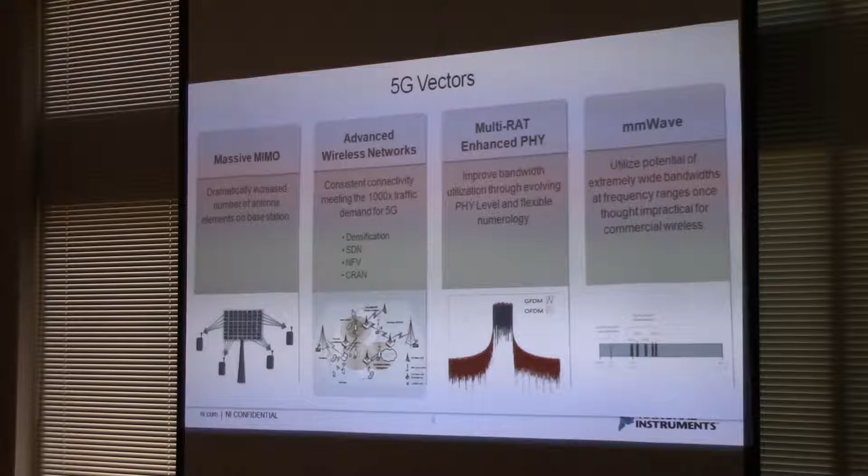So the first one up is massive MIMO, then advanced network architectures. This is very closely related to things like cloud-based RAN that we've talked about this week. Multi-RAT and basically better waveforms, so things like GFDM, LoRa waveform, things like that, and then millimeter wave, so higher spectrum, channel sounding, all that kind of thing. What I want to do just before we use the radios is give you a little impression about who uses these radios and what they use them for.

So let's dive in. So massive MIMO, we're all familiar with massive MIMO, right? We can take multiple antennas and start to beamform in order to serve multiple users on the same frequency. You get much higher spectral efficiency. You get much higher transmit power efficiency. So there's a lot of interesting work going on here with these radios at a number of different universities and a couple of big names out in industry. I want to show you a couple of the examples.

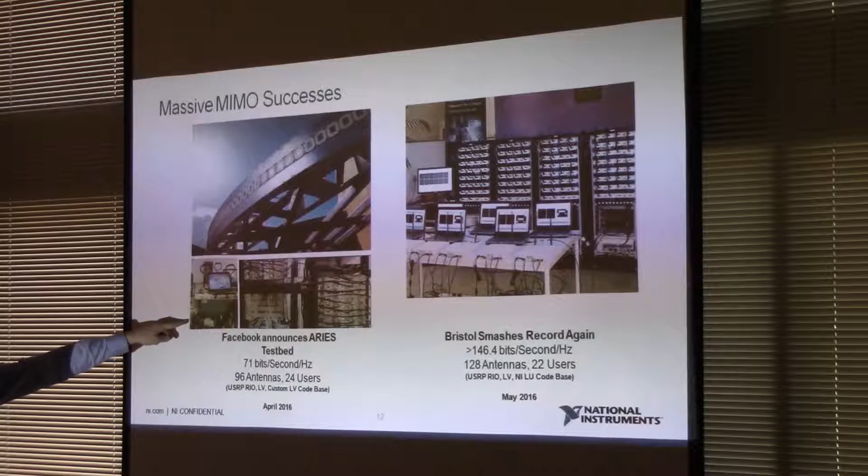So these are 2 customers of ours, and you'll recognize these are those radios you have in front of you and some down here. This is the base station all in the rack, and these are the user equipment. And then this is Facebook's base station and their user equipment. Can you see it's on wheels? It's automated, so they can drive the user equipment around to different places. Now these 2 guys were competing for a long time, but they're actually in very different fields.

So what Facebook are doing with Project ARIES in the Facebook lab is actually trying to use millimeter wave up at even 90, 91 gigahertz, and they're trying to use massive MIMO in order to push the signal further, because you can focus the beam, like a bulb versus a spotlight. You can make the energy actually travel further. And they're trying to do that from a rural mobile broadband point of view. So they want to be able to begin with fixed point access to rural areas.

And you've seen the previous Facebook lab projects around their internet access in India. They currently have a couple of helium balloons up over Peru for disaster relief broadband internet. So it's this similar kind of idea, being able to deploy a mobile broadband network without the need for putting in physical infrastructure.

And then Bristol, coming from a different point of view, they were actually trying to drive spectral efficiency. So this is part of a city-funded project in the city of Bristol in the UK, where they are trying to realize the Internet of Things and all of those billions of connected devices. Now there's nowhere near enough spectrum available with our current technology under 6 gigahertz in order to connect maybe 1 million devices in Bristol.

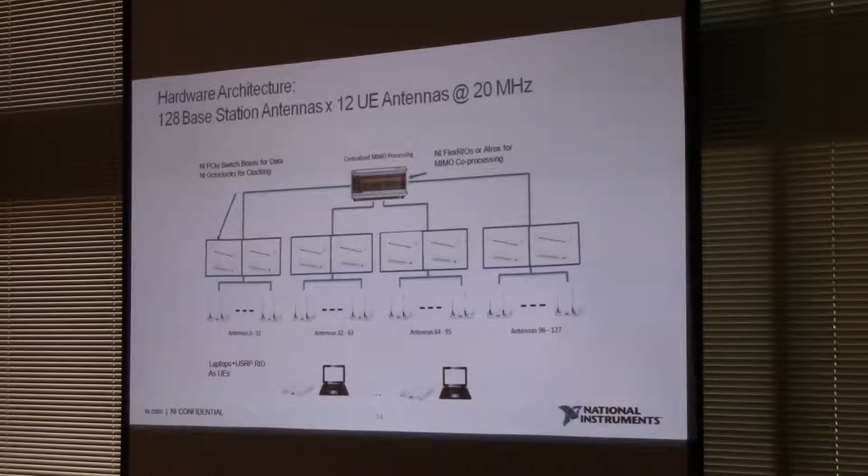Okay, so we'll switch to slightly different aspects. So this was on our NI Week keynote stage a couple of years ago. This was what Samsung did with FD MIMO. Is anyone familiar with FD MIMO? Okay, so exactly, yeah. Being able to do full duplex MIMO is going to not just take that 140 bits per second per hertz, but could increase that. If we can go full duplex over the channels instead of TDD, FDD, all this kind of thing, then we could push that 140 to 400 bits per second per hertz. And that would be an absolutely insane number.

And then as well, they were doing a bit of full dimension, whereby normally when we talk about MIMO, we put all the antennas in a row. That only gives you spatial multiplexing in one plane, X and Y. But if you were to put the antennas into a 3D grid, then you can start to spatially multiplex up and down as well. So we've gone from focusing these triangle-shaped beams to now focusing spotlight beams. And that's really good if you want to service an environment like a stadium, or maybe you have an apartment block of flats. Now you can target a certain flat within that apartment block.

Apartment, flat. I'm trying to translate for you guys.

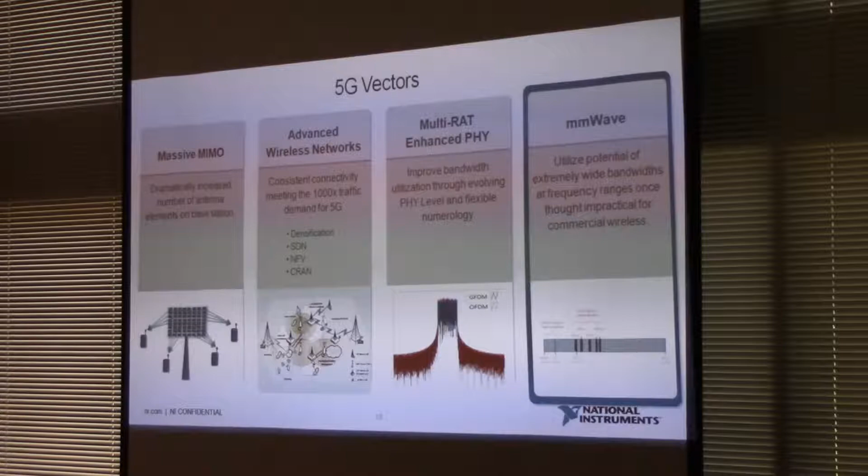And then lastly, we'll jump straight into some millimeter wave stuff. These ones are 2.2 gigahertz actually. These are some of the older models. We have USRPs that go from 10 megahertz up to 6 gigahertz. But if you want, we have hardware as well that goes into millimeter wave for things like high accuracy measurements in channel sounding.

But you can also use these USRPs as the intermediate frequency within your superhet design, and then you can externally put a millimeter wave head on the front of that. So we worked with NYU Poly and Nokia on two different kinds of case studies.

So the first one up, this is Dr. Ted Rappaport from NYU Poly, and he used to be at UT Austin actually, right next door to us, before he moved there. Now Ted's always been into the millimeter wave side of things, and up until very recently, all of the 3GPP standards were being centered around, how to say it politically correctly, around a millimeter wave channel model which was almost entirely theoretical and based on how millimeter wave CW sine waves interact with an environment.

Nobody had ever taken a complex wave like a CDMA wave, pushed it up to millimeter wave, and then seen how a channel or a room or an environment reacts. Ted was one of the first to publish any data on how real-world communication signals react at millimeter waves, and it turns out it's wildly different to how a sine wave interacts with the environment. So his environment was New York City.

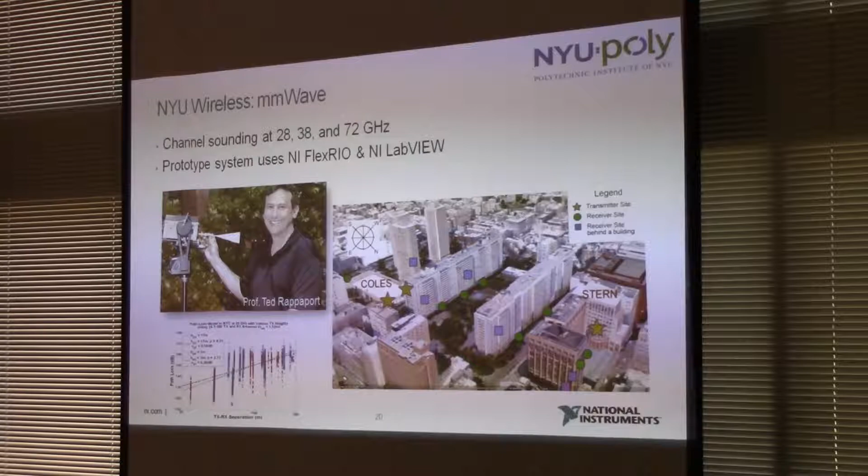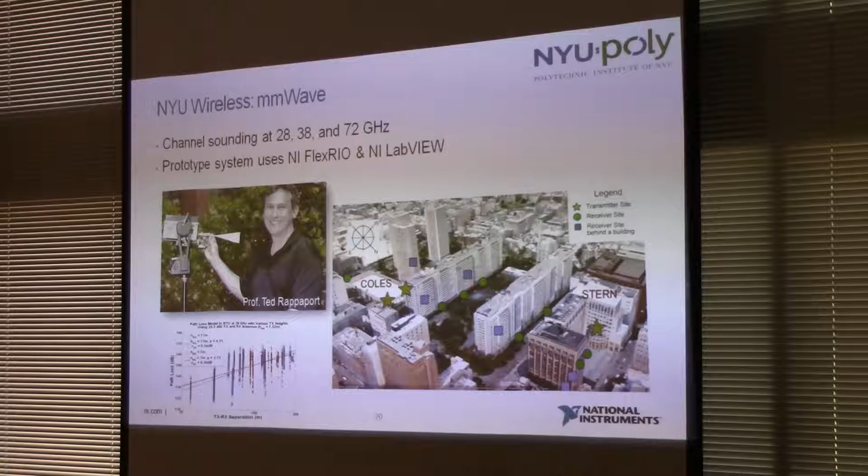That was his playground, and he set up these motorized stages with a millimeter wave head on top. Out the back it goes to the PXI chassis, and a horn antenna on the front for that directionality. And he set them up around the city, and they were automated, so they could turn around and do channel sounding within New York City. And the results he got went into the 3GPP standard, and now almost all of us within 3GPP are working off Ted's channel models, and have been for a couple of years now.

And then lastly, Nokia, again like the massive MIMO side of things, were in millimeter wave as well, but they had a very different interest. So Nokia have come from being the world's foremost handset provider. Most of us are probably old enough to remember owning a 3210, the indestructible phone that lasted a week on battery. But now what they're looking to do is more on the base station side, more on the service providing side,

and what they were working towards was up at millimeter wave you can facilitate channel bandwidths that are absolutely huge compared to sub 6 gigahertz. So instead of your typical LTE channel bands at 20 megahertz, 40, maybe if we look at 802.11 you have 160, and now people are talking about 200 megahertz channels. At millimeter wave, instantly you can have a 1 gigahertz or a 2 gigahertz channel bandwidth very easily. People are now starting to talk about 3 gigahertz channels, and that allows you to push the data rate insanely high.

Now, I don't know what we're going to use this data rate for on our mobile phones. You can download a full 4K Ultra HD video in 10 seconds. But then again, when we made 3G and CDMA became popular, YouTube didn't even exist, let alone YouTube on our phones.

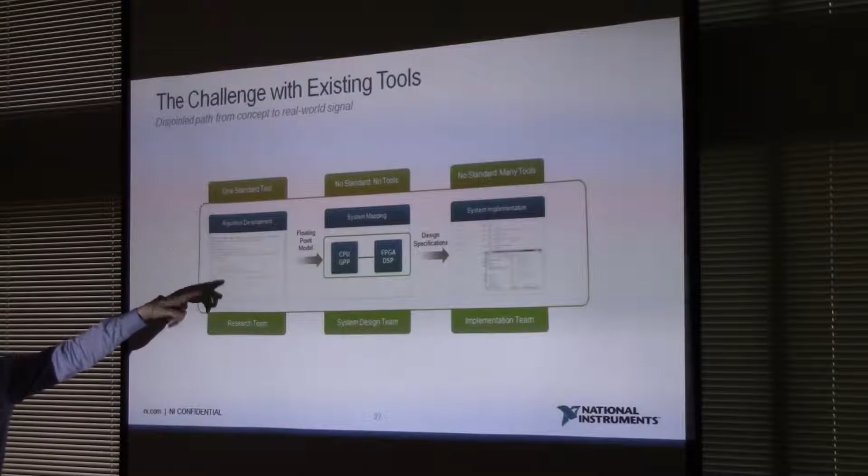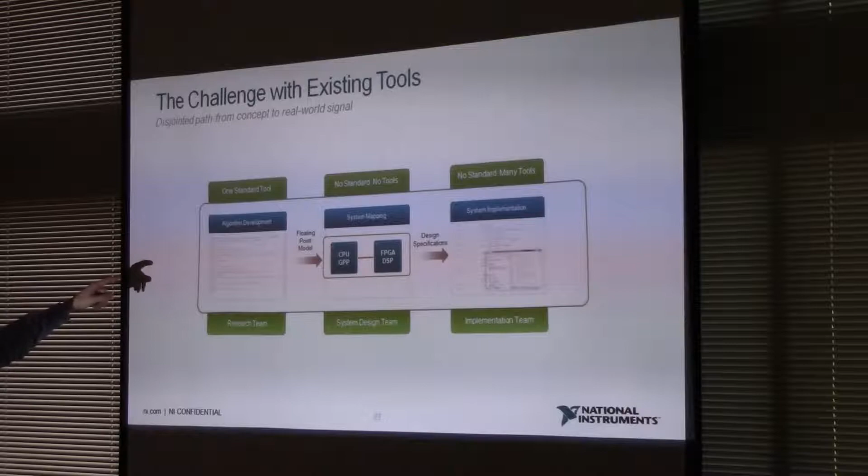Well, you know, this is a complexity problem. It's also a time problem, which is important for you when you're trying to deliver on deadlines. It's important for industry when they're trying to get to market as well. So we described that algorithm development stage. Then you have to go into the mapping stage. And if you come up against problems in the mapping stage you can't get around, you have to go back to the algorithm and start trying to problem solve there before you can get to the next stage again and prove out whether you actually did. And it takes ages to go back and forth in this process.

So wouldn't it be cool if there was one environment that covered it all? You could do the algorithm, you could do the system mapping, and then you could deploy it to a working prototype without ever having to learn a low-level programming language or having to step outside of that one environment, so you don't have this back and forth process. And lo and behold, as you guys have probably guessed, for us at National Instruments, that whole environment is LabVIEW. So that's what we'll do. I'll show you how to design an algorithm, show you how to deploy it, and then I'll show you how to get it working over the airwaves.

So, without further ado, let's actually use the radios. Now, what I'll do is I'll try and run the class from the front here, and everyone can follow along. Some of you will be new to LabVIEW, some of you will be new to software-defined radio, and so forth. So please ask questions, make this interactive. Don't make me wear out my voice the whole time. And we'll walk through and I'll show you what to do at each step.

Now what we're going to do is just take the hardware and the software for a test drive. I'm not trying to teach you how to use LabVIEW. I'm not trying to teach you what software-defined radio is. I am definitely not trying to teach you how to implement LTE or what is an LTE stack or anything like that. Remember, I got my master's, you guys got your PhDs, so we got to respect that.

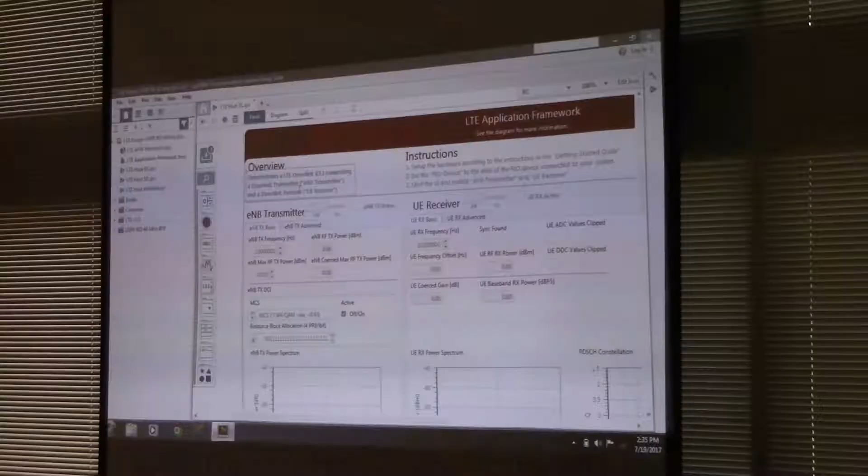So let me close all this down, neaten this up a little bit so we can see a little easier. Now what has opened up is the LTE host downlink piece of code, and this is a complete transmit, receive, loopback piece of code. We don't want to do that. That's just transmitting and receiving on the same device. Let's prove that this works over the airwaves for real, and I'm taking a bit of a risk here. So right now I'm going to play the, no, not yet. I'll play that role in just a minute. Using the little X at the top, close that piece of code. We don't want that loopback.

Guys in the front here, you're my base stations. Can you please go to this piece of code, double click it, and it'll take just a minute to open. This is your base station. You might see this arrow is not yet green. It'll turn green after 10, 20 seconds. That means the code is compiled and is ready to run. What you need to do is just a couple of things. Over on the right-hand side of the code here, it says RIO0. And it says clock source is internal, so it's going to use its own reference clock. That's good news. And then what you can do is just press the run button.

Well, why did I do that? I have no hardware connected. So I'm going to come back now and just take a look. Cool. So over on the right-hand side of that code, there's this FPGA ready. Now what that means is that we have fully deployed to the FPGA, and the FPGA is ready to go. You should have a blue box in there. Does anyone not have the blue box? You got it? Cool. Right, now that the FPGA is deployed, we're ready to run the base station.

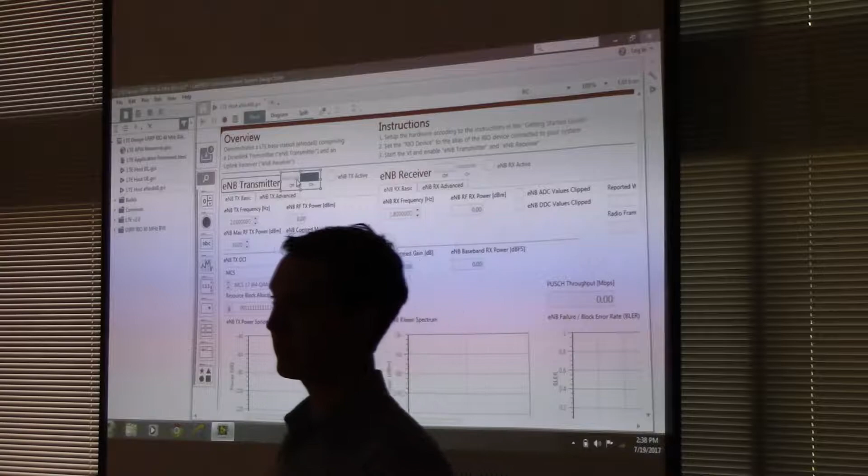What you should find is a frequency control. You might have to go over to, yeah. Okay, so you want to change that to 1.7G. 1.8? 1.8 gigahertz, 1.9, and you guys can leave it at 2. You get 2. I'll collect the submission fees for that after. Can we do the same? So 1.7, 1.8, 1.9, and then you guys can both go on channel 2. You'll both receive off this one base station.

Okay, now try running your transmitter. Excellent. So base stations, now you're transmitting just the downlink side of an LTE stack, but let's get some uplink going as well. So can you turn on your receiver and tell me what you see on that graph? Okay, that's good. Do you see a bunch of mess? Oh yeah, please run the frequency. What is it? Okay. Let me take a look at mine.

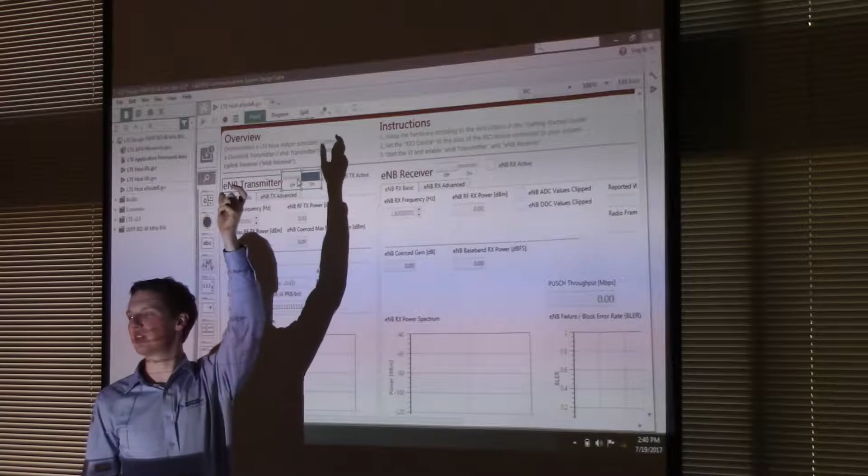So if you go for 1.75, 1.85, 1.95, and then 2.05. Yeah. So can you see that you have this receive frequency? So we're doing FDD, right? So let's change that. Just put it 0.05 of a gigahertz above your transmit frequency.

And you'll have to turn the transmitter off to get that frequency to apply and then turn it back on. Sorry, the receiver, I mean. The receiver only? Yeah, just the receiver. And then if you turn it off, back on. Cool. So you should see very little. There's a little bit of noise in there, that's interesting. There's a couple of spikes. This is good. Oh, a couple of spikes there. I wonder what that is. All right, we're good to go.

So guys, are all your FPGAs ready? Excellent. And your frequencies for your receive is 1.7, 1.8, 1.9, 2.0, right? So can you please press on for the receiver on the left-hand side? Oh, sorry. Yeah, sorry, I've done that wrong, haven't I? Sorry, the receiver's on the right-hand side. So you can... Okay, it's kind of messy. It's not bad. You guys have got something sort of... there's a bit of a stack there. Just a peak. Okay. And that's a 2.05.

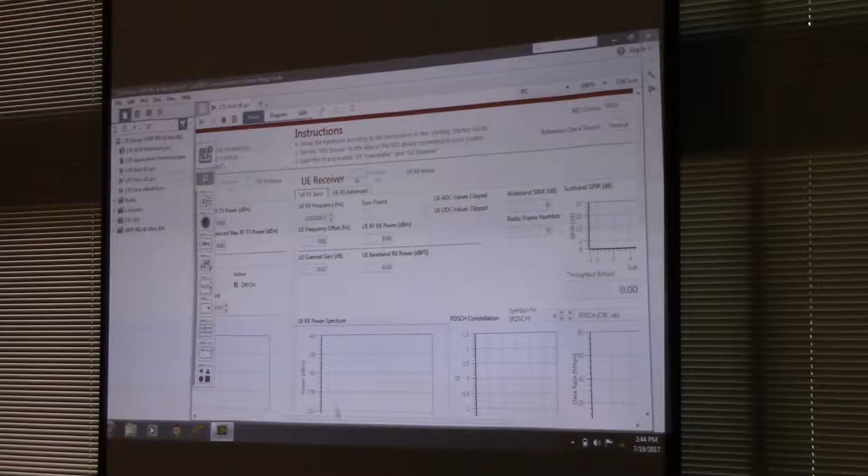Oh, right. Sync cancel. And we just need to stop the code. So if we scroll over to the right, you can press the stop button there. Yeah, I should have pointed out to you guys as well, there's a stop button over on the right here. If you need to stop the code, you can press that. It's better than aborting the code, because aborting the code will leave some references open, which is normally okay, but sometimes it will cause you problems later. So use the stop button to stop the code when you can.

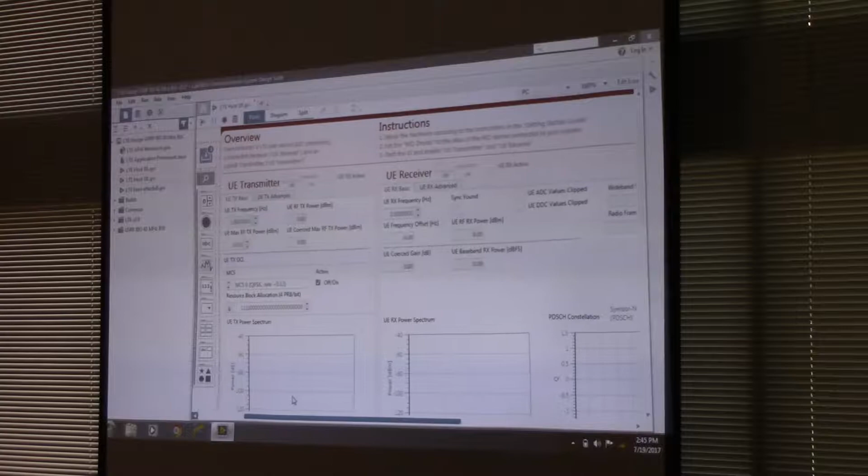And then what we'll try and do here, if you open up the eNodeB, and if we go to edit at the top left, and reset panel to default, and now run this code. Cool. Let's just scroll across. FPGA is ready, so let's go over to the left, turn on the transmitter and the receiver. These frequencies are good. Okay, so if everyone now turns on your downlink receiver, let's see what you get. So we're just using one base station now.

Okay, the constellation comes through, it's a little bit messy. Which process? Just leave them as defaults. So if I look correctly here, host UE. So yeah, the receiver frequencies are up there. So 2 gigahertz receive and 1.8 transmit. So if you now turn the transmitter off. Did everyone just lose connection? Yes. Good. And then if you take that power, turn that to 30, and turn it on again. How's that constellation? Okay.

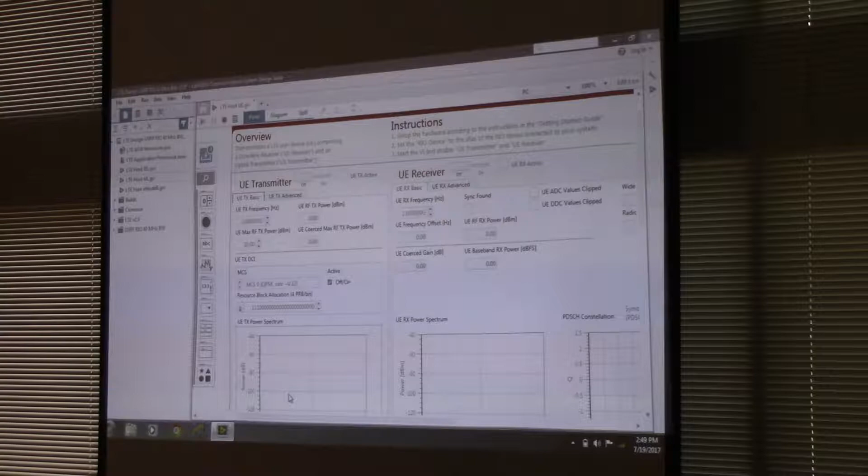So, you know that stop button I told you about? We can all stop the code now. You can stop the base station as well. So what we just managed to do, we've gone from making multi-base station, multi-user connections. Now we set up one base station, and we made a downlink connection and then an uplink connection back from everybody to this one base station. But you saw that constellation was pretty messy as well.

So what we were doing with these pieces of code is we've set up this LTE physical layer stack with a little bit of MAC on top, but we're only sending pseudo-random ones and zeros, just a bit stream of noise. So wouldn't it be more interesting if we could actually put an application on top? I mentioned before how we can pair up LabVIEW with other environments, like NS3 or other things. What I want to do now is pair it up with VLC Media Player, and we'll do that using a UDP port.

I should have drawn out a diagram beforehand. We'll do this on the fly. Microsoft Paint. VLC is orange, isn't it? So we're going to set up a VLC player and a second VLC player. And this is going to talk down to LabVIEW. No, undo that. That's not what I want. And then we have the software-defined radio, right?

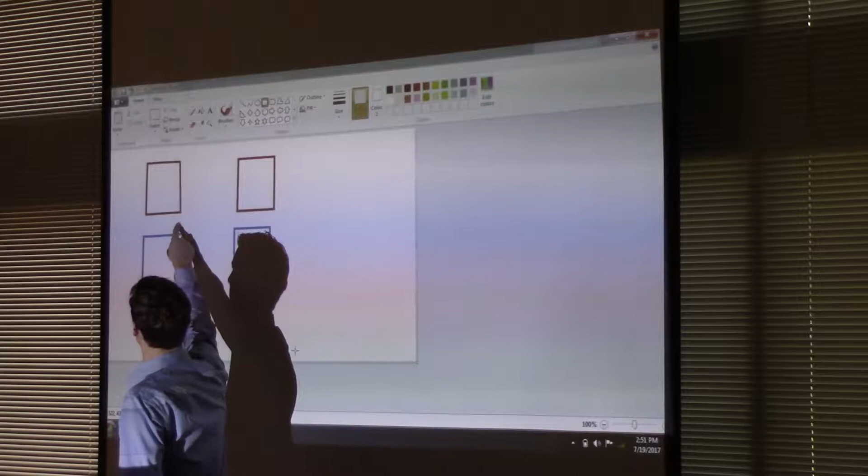So we're going to set up a stack whereby the VLC player spits out the video stream to a UDP port. Then LabVIEW looks at the UDP port to pick that up, and transfers it over PCI to the radio. The radio is going to transmit it. We're going to do this in loopback, just for the sake of time. Pick it back up over PCI to LabVIEW. LabVIEW then decodes that video information and puts it out to a UDP port, where VLC will look for it and receive it. So we're making an entire end-to-end video downlink.

So back in this piece of code, use the little X to close everything down. Use the stop button to stop the code and then close it.

What we'll do is we'll open up that last piece of code at the top. Can you see there the LTE host DL downlink? And as soon as you've got the green run button, press run and get that running. And then go over to the right-hand side and look for that FPGA ready button. Anybody doesn't have FPGA ready? Okay, good stuff.

Now what you can do is come back over to this view here. You can leave the frequencies as they are, and what we'll do is we'll try this and see if we get a lot of interference, and if we do, we'll spread out different frequencies. If you turn the transmitter on, you should see the frequency block come up. Turn the receiver on and you should see the constellation.

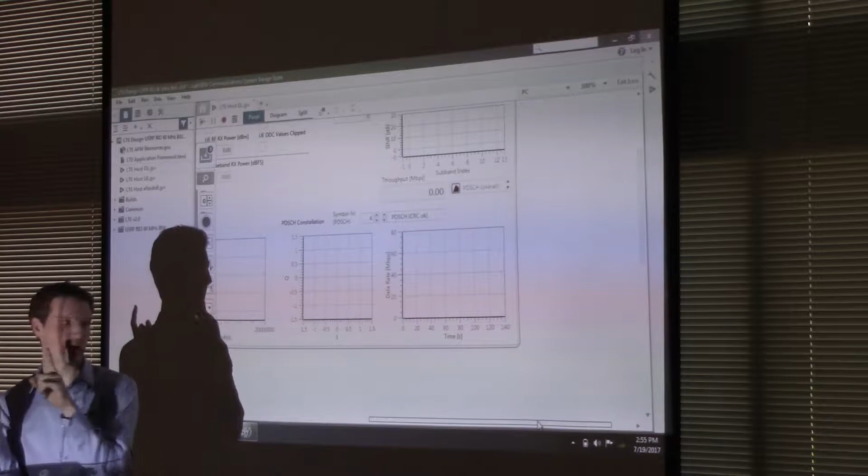So you should get a really nice constellation plot here, really neat, because the transmitter and receiver are right next to each other, and you should start to get a throughput graph here, and that graph should be almost entirely all green. Now what that means is that we're just doing what we did before. We're transmitting just a pseudo-random stream of ones and zeros. The green on that graph is ones and zeros, just random noise data.

If you start to see blue, that is user data, and that'll become important later. What this piece of code is configured to do is that if we're not using the entire downlink channel that we have described at the clock rate that we have described it, it will pad on to our user data just some random noise, just to make sure we're always using the full channel for ease of use.

So, what I want you guys to do now is, if you go to the desktop, let me show you, you should find Application Frameworks Video Demo. I want you to open that up, and there's a folder in there, Video Demo, and there's a number of batch files here. What I want you guys to click on is this one. So Video Loopback LTE. If you double click that, we get another warning message, just say, yeah, allow access. You get 2 video files playing.

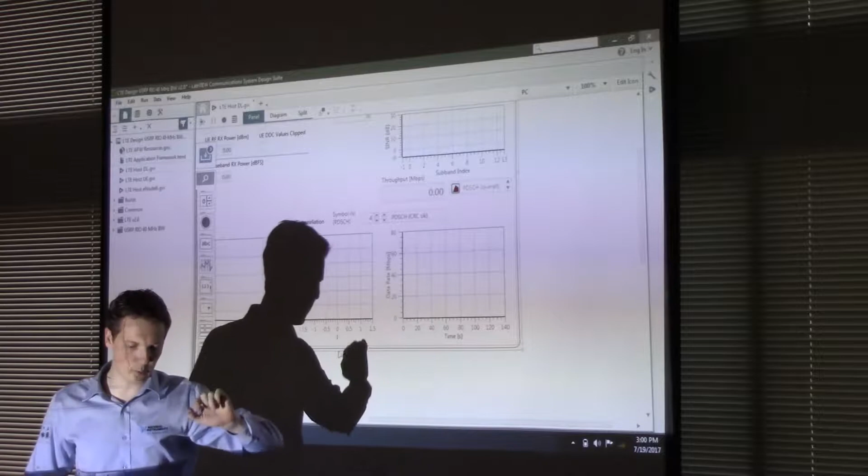Now what I want you to do is head back to these graphs that we talked about. What you should see on your data usage graph is that yes, you still have a lot of green bandwidth, but you should have some blue bandwidth as well. Now that is your video data. That's how much of this 40 megahertz, or I think it's actually a 20 megahertz channel within a 40 megahertz band, that we're actually using. Is there a tiny bit of blue? Tiny bit of blue for HD video.

Okay, so now let's start playing around with that channel. What you'll see is that you have a characteristic shape on your transmit that you should be able to see on the receive as well. It's like the full LTE band, but there's a notch out of one side. Now what that is, is that we have decided not to use the two first resource blocks, those two subcarriers right at the start of the band.

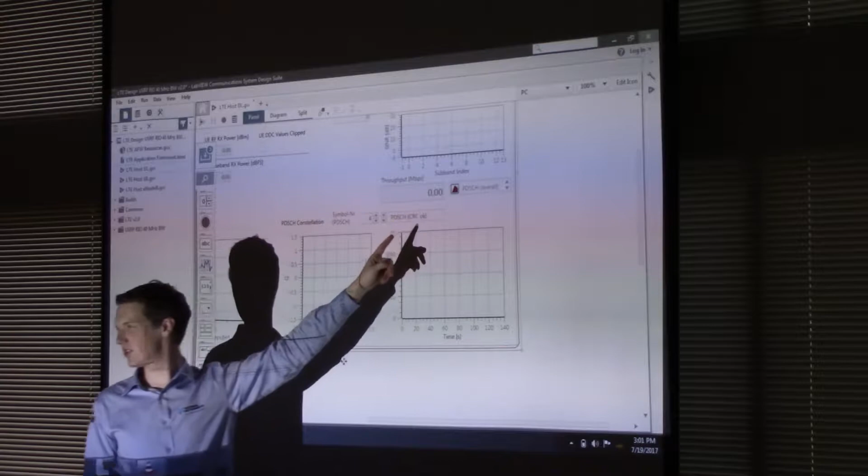Let's mess around with that a little bit more. Take note of what number you have here in your throughput. That is your total data throughput, video and random noise for the whole channel. If you come over to the transmitter here, what you'll see is that there's this resource block allocation. And you see we've chosen not to use the first two subcarriers. Let's knock out a couple more.

So if you click in the middle of there, and if you delete five ones, put in five zeros, anywhere you like, just make sure you get the correct number in total. And then click outside of there. What you should see back over on your transmit and your receive is that those resource blocks are now missing. There's not even a carrier inside them.

Now, I mentioned GFDM at the start of the session. What we were doing with Gerhard Fettweis on these devices with GFDM is we were knocking out some of the non-essential resource blocks in the middle of an LTE band and putting the very narrow GFDM spectrum inside those missing resource blocks. That actually allowed GFDM and OFDM to coexist together inside the same channel, which was pretty cool.

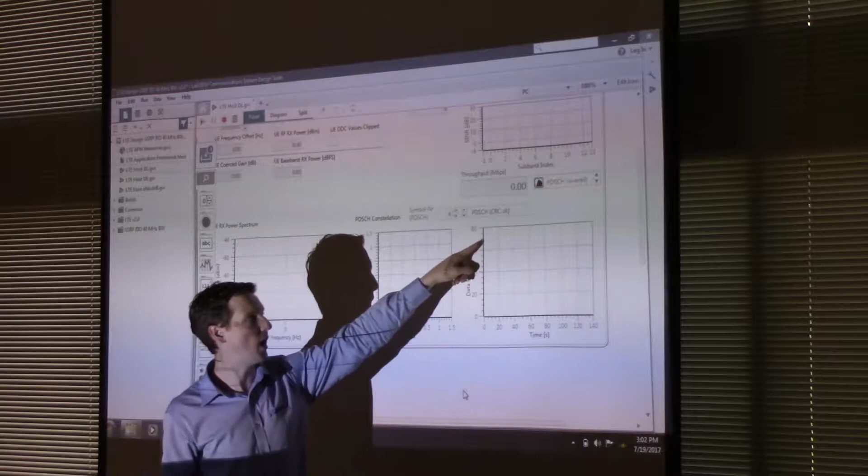What you'll see if you scroll over to that data throughput is you should see a notch where your data throughput has gone down. And if you look at the throughput number, that should be a lower number of megabits per second in total. Does anyone not see that?

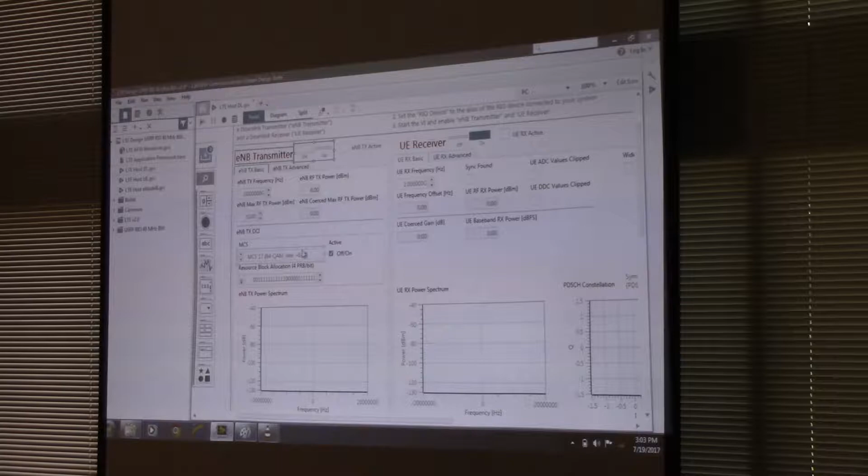Okay, cool. And then lastly, what you can do is come back over to the left-hand side here and turn off the transmitter. And then go back to that video. Hopefully you've still got it in front of you. The video should last 1 or 2 seconds and stop. It should freeze on the final frame that it has a valid transmission for.

Go back to the transmitter and turn it on. Turn the transmitter back on. And what you should see is that video picks back up as soon as the video buffer is full. And you'll notice it doesn't pick back up from where it left off. It picks back up at the most recent transmission. So it's actually skipped a few seconds forwards so that you're always viewing live data.

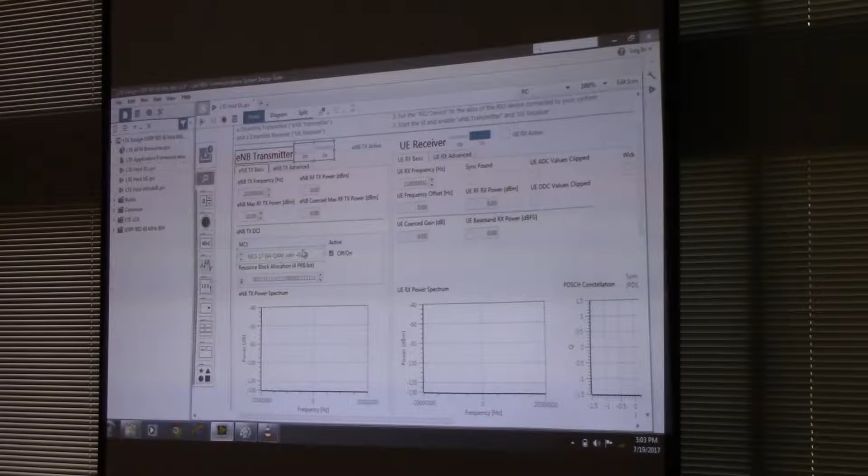Okay. Is everyone happy? All right, excellent.

So again, at the top of the screen on the right-hand side, you can use the stop button to stop this code. And then what we'll do is, I need to grab some water. If anyone else needs to grab some water, do it now. And we'll run 2 more exercises after this as well.

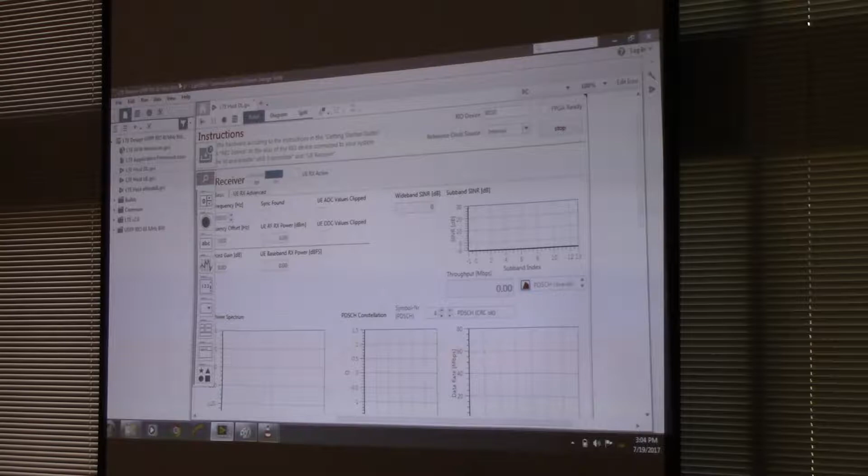But for now, we're done with the LTE stack. So let's leave all of that LTE stack behind. Let's go right down to the physical layer. We'll talk just about OFDM, not so much about LTE now. And what I want to show you is how do you use this hardware and software in order to do algorithm prototyping and design. So I'll show you the first one up here on the stage. You guys can follow along, but I'll do it quite quickly.

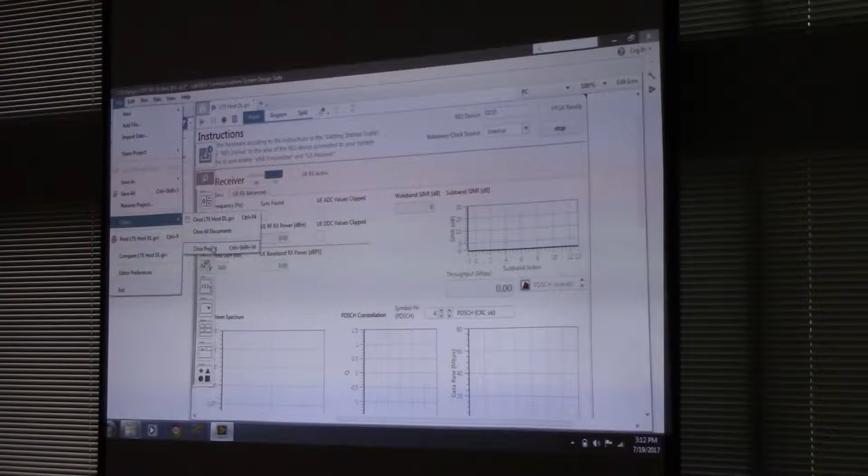And now what I'll do is I'll take us over to the learning section that I said we'd use. No, let's go into getting started. Actually, yeah, let's go to the examples. I'll show you a completed one just for the sake of time. No need to follow me here. I'll just show it for 2 minutes. You can see we have all these different completed examples for different basic modulation schemes.

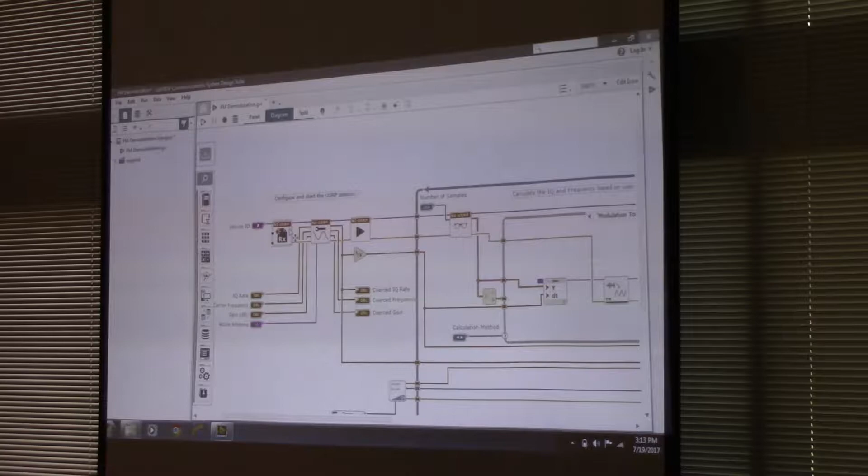What I want to show you is the ability to program in whatever computation method works for you and your particular project. So at the moment, we've been programming primarily in LabVIEW, which is all of these function blocks with the wires that travel between them. I'll show you a couple of different ones now. The first one I want to show you is that with programming languages, there's always 100 ways to do any one task. Now what we're doing is FM demodulation.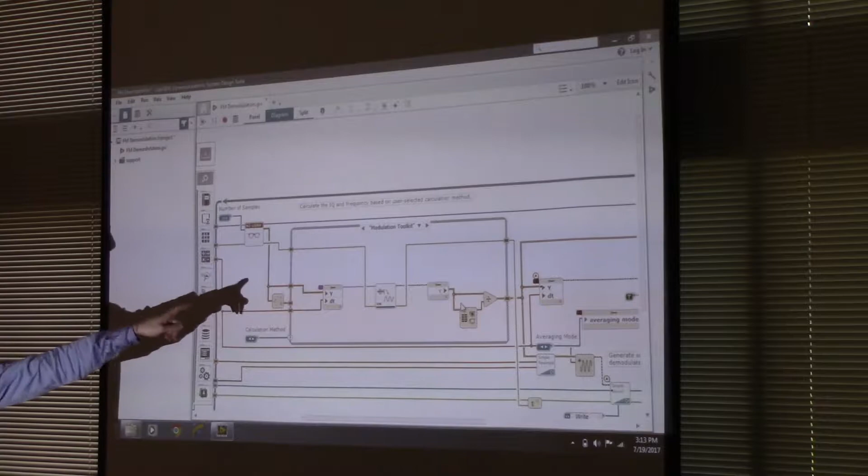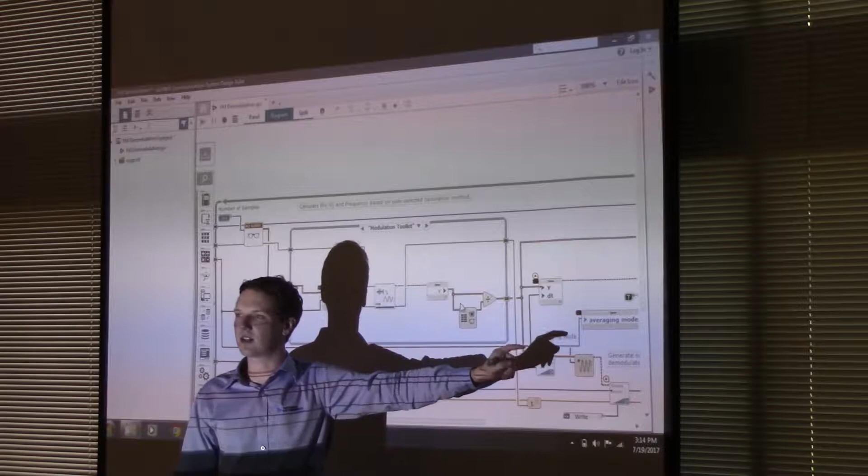Over on the left-hand side, I find the USRP. Here I do FM demodulation on the signal that I read out of this block. Then I resample it, send it to the sound card of the PC, and play the radio station that I'm trying to listen to. What you see there is that inside LabVIEW, there's an FM block. Right? This is about that inbuilt IP that's already in the software. So for FM demodulation, there's a block.

This is good if you want to just test ideas quickly, because you can take that block away, go put the AM block in. Take it away, go and put the QAM block in. It takes like 3 clicks just to change what modulation or demodulation you're doing. So it's really quick to take an idea and just test it out. You don't have to necessarily consider whether it would really work. You can just try it. Makes for some very lazy programming, which I quite like.

Sorry? Oh, it's demodulating FM signals, I think. Or maybe it's just called FM demodulation. It should be in the modulation folder.

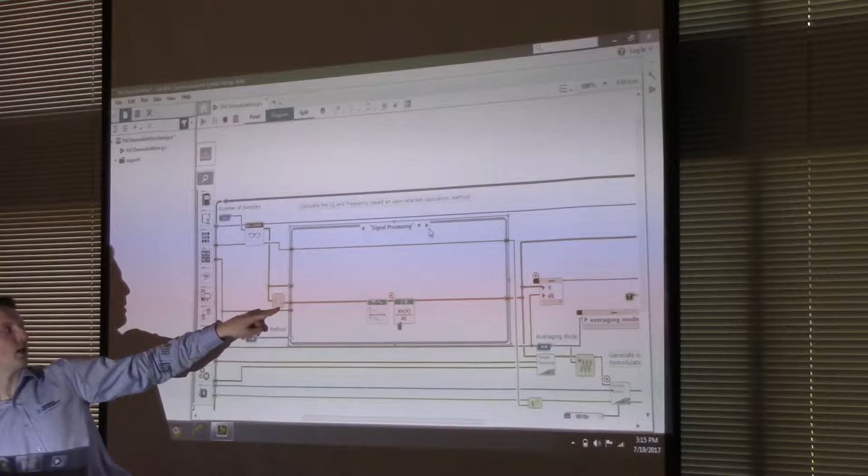Now, you can actually do things a different way as well. You can use those LabVIEW functions but you can do the algorithm yourself. So if you don't like our FM demodulation algorithm, that's okay. You can build one up. So this is the unwrap phase function in LabVIEW. So we get the phase. So this is the complex coming in. You've got real and imaginary coming out. Take that phase, unwrap it, and then we do a differentiation. That's a differentiation block. And that's all there really is to FM demodulation.

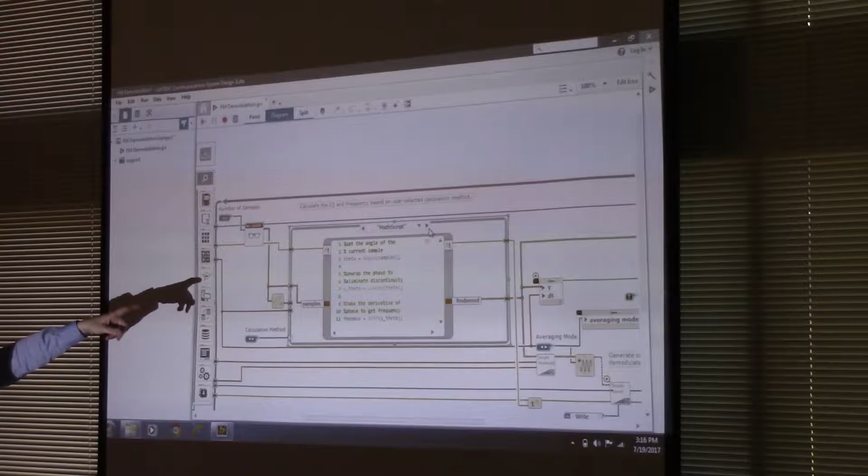Or, if you want, there's another way to do the same thing. So here we use .m syntax. Now, almost all of us have got some existing IP in .m, some existing project or code, or you go online, you go Googling to try and get some help, and somebody else has done it, but it's for a different environment. You can bring your .m in here. This is a full debug and deploy, so if you want, you can create your .m in there, and it has all of the usual functions, drop-down suggestions for syntax and error checking and all that kind of thing.

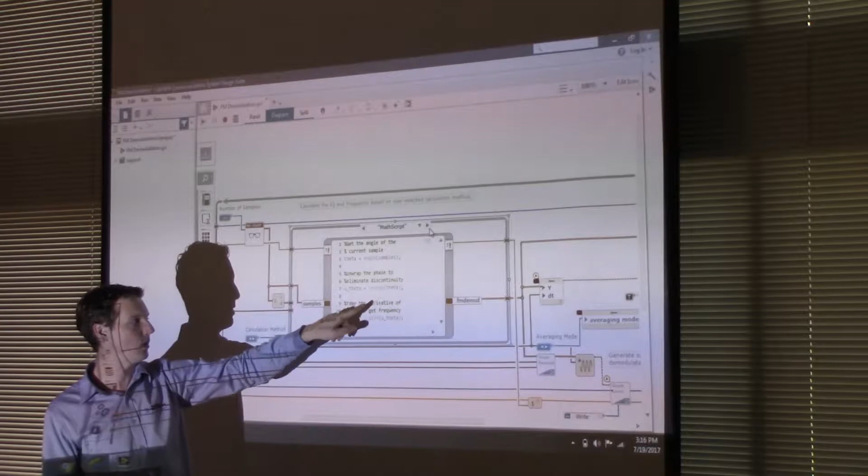If you want, you can import and export .m files as well, so you don't actually have to copy and paste every time. And there's this block for .m, and you can see it's all the same. We find the angle of our samples. We then unwrap the angle, and then we just find the FM demodulation product by differentiating the unwrapped angle. It's exactly the same as what we did before.

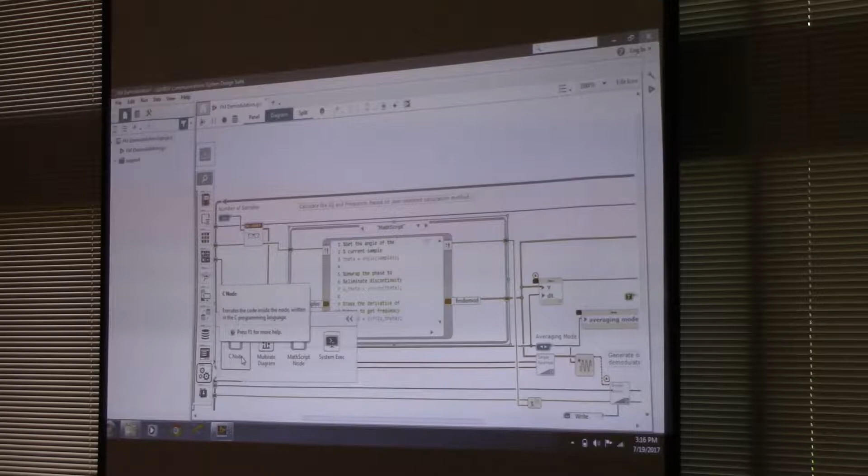There's also here inside of, oops, sorry. Let me see, where are my models of computation there, sorry. There's also a block for C. So you could do exactly the same in C programming if that works for you, or if you have existing IP in C.

So what I'll do is I'm going to just close that project without running it for the sake of time. What I want to do is show you how we do all of this on the FPGA, not just high level at the host. So if we come back here, let's go to getting started, and everyone can follow along now. So we're on learning and we're on learn, not examples, and we go getting started. And then let's go into overview of FPGA design flow, that middle one.

And for the sake of time, we'll dive in on lesson number 2. So let's go into algorithm design and testing. So if you click that, you click on create. And what you get is Clippy. This is the lesson here. This teaches you how to use the environment. You can go through this in your own time. You can click through and it teaches you exactly what to go and do.

All of this is hyperlinked. It's HTML coding inside of here. So if you were to click on a certain part of this, it can actually operate the environment behind it for you as well. So I'm just going to minimize, no, actually, let's keep that pane open for the time being. What we have open here is a test bench. I'll ignore that for now.

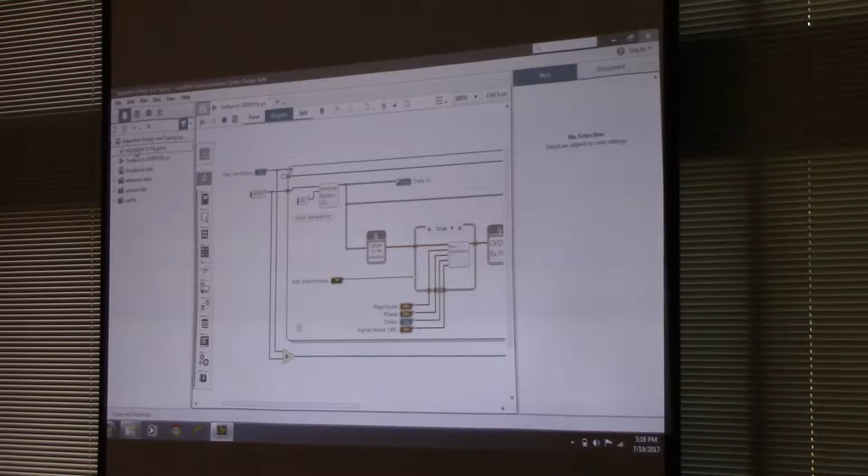And what I'll do is I'll double click, can you see my OFDM TX? You want to get rid of Clippy, get rid of the lesson. Come here, and it's actually going to try and teach you how to use the thing. Just say, okay, I got it. Just leave me alone, get rid of the tips. And you should have here what's called a multi-rate diagram.

Now, how many people in the room have ever used GNU Radio? Yeah? 4, 5, 6? Okay. And how many more people know of GNU Radio? Have heard of it? So GNU Radio is that open source software that I described before for programming these radios. This multi-rate diagram will look very similar to what you'll be used to from GNU Radio Companion, which is the graphical way of working with GNU Radio.

So what I want to do then is we'll follow through on a couple of instructions here. Let me just get to my page. There we go. So what we want to do is put into action an OFDM algorithm. And the start of any algorithm is going to be some kind of stream of data. So over here on the left-hand side, you see stream manipulation. And we want to bring in a stream constant. We're not going to have a stream input. We'll just have a stream constant because we're not going to change that stream of data. This is actually going to be pilot data that we'll put in.

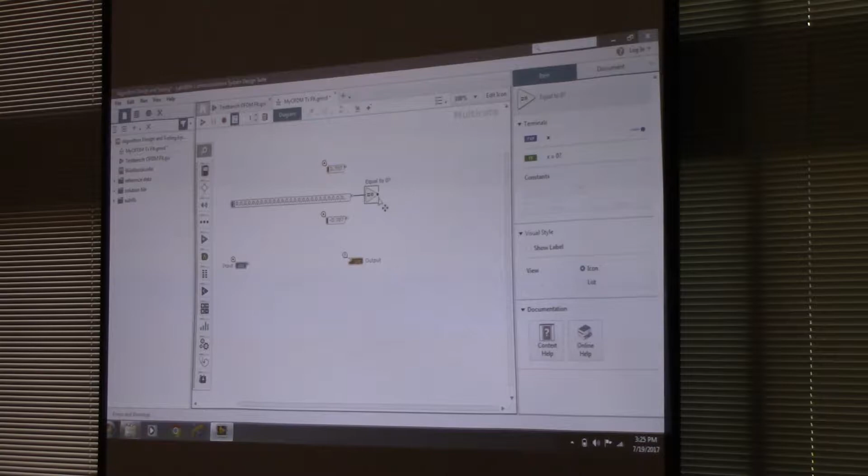Now what we want to do is actually map the data. So again, I'm going to use Control Space, and I want to find equal to 0. You see that function there, equal to 0? If you type just the word equal, it should come up. Click that, drop that in front of there, and then if you hover over the edge, you'll get this wiring tool. I want you to wire the two together. So what that's done is it's changed our fixed point data type into a Boolean data type. Now I have trues and falses instead of ones and zeros. It's the same data, it's a different data type that we can work with in the next stage. Slow me down if I'm going too fast.

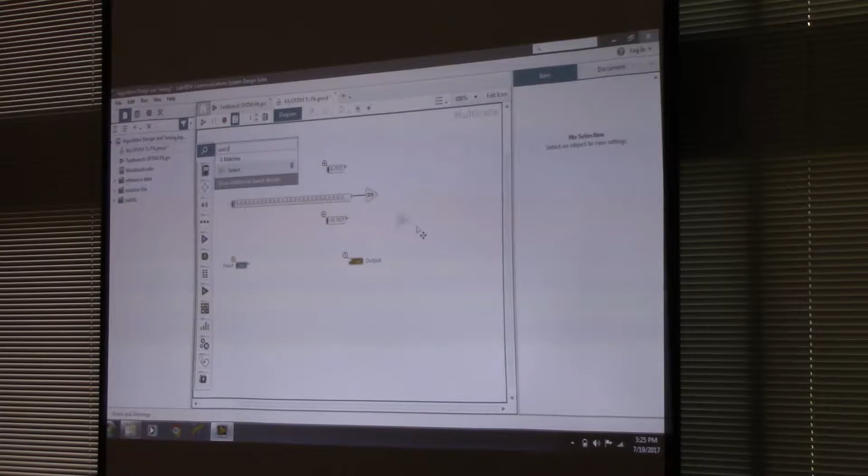So Control Space one last time, and what I'm going to do is type in select. Now select is like a really lazy function. This is an easy way of doing an if-else statement. So drop down your select, and you see it has 3 inputs on the left-hand side. Wire in this equal to 0 into the middle. Wire up this 0.7 into the top, and at the bottom, wire in negative 0.7. What we've done is we've just programmed in LabVIEW an if-else statement that says, if 1, create value 0.7. If 0, create value negative 0.7. All right, so let's carry on going then.

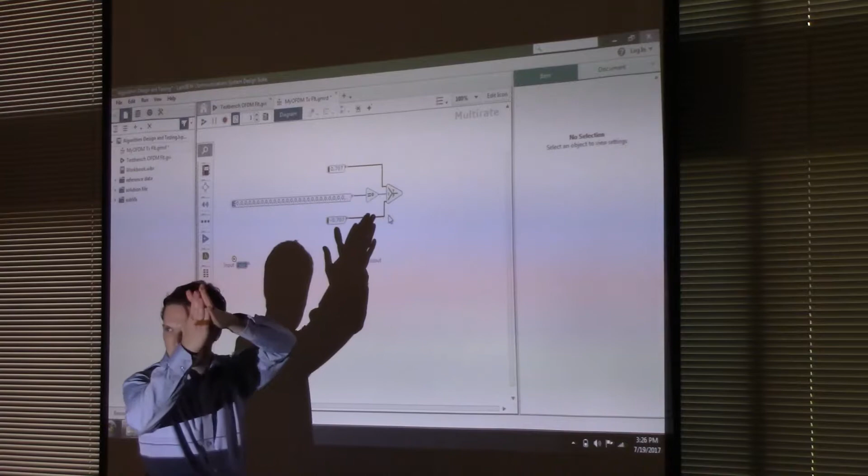So now that we have mapped, this is our input bit stream of pilot data, and we've mapped it to this. This is our constellation map, essentially. We've mapped the two together. What we want to do now is actually build a packet. So I'll take you through the design stages for that piece by piece. So the first thing we're going to do is we need to break up this long stream of symbols into IQ data. You remember I said the radios receive IQ data and transmit that IQ data. So we need to get from symbols to IQ. That's pretty easy for us to do in this environment.

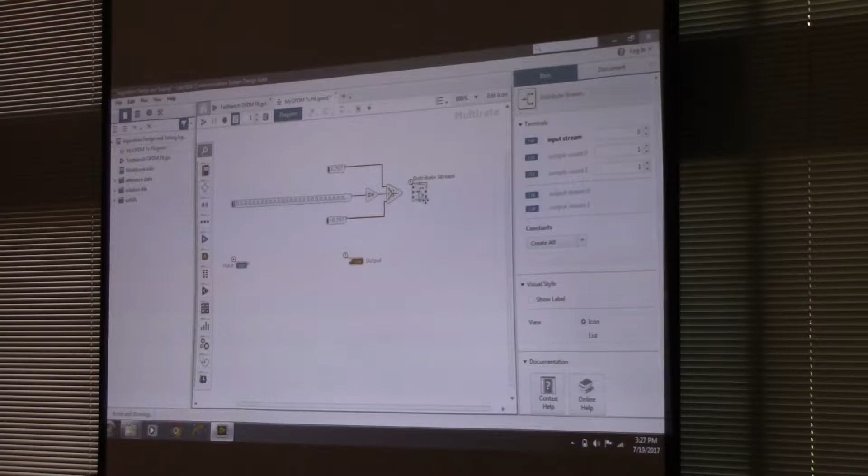If you guys come back here to this stream manipulation palette, what we want is this one up at the top, distribute stream. Can you see the symbol? It's 1 in, 2 out. If I click on that and drop it down, what I want to do is I actually want to wire in the very top.

No. Should stop using the trackpad. Wire it into the top there. What that's going to do is it's going to take each symbol and split it into 2 data streams, an I data stream and a Q data stream. And the next stage that we're going to do, it sounds wild, but we're going to recombine the data streams. But we're going to recombine them into a different data type. So all of this is data type manipulation that we're doing in order to get from our high level down to hardware. Sorry, go on.

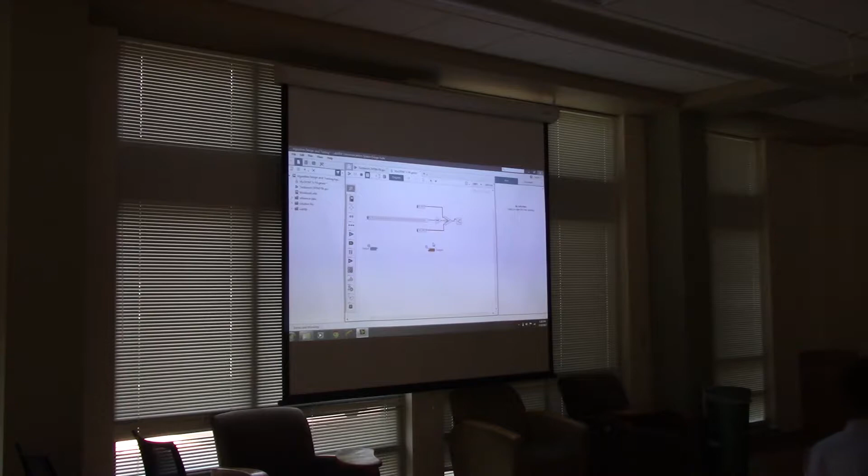Not quite, because we'll receive those same symbols at the other end. It's a really good question. Within the algorithm, there's a time at which the data is running at half pace. That's a fantastic point I want to come back to in 5 minutes. But from a downlink point of view, we transmit the symbols and we don't lose the data rate. And then at the other end, we break those symbols out into 2 bits. So it's as though our data rate doubles again at the other end, so we never actually lose it. But really good point about the sampling. And that's the whole point of why we're doing this in a multi-rate diagram. So we're going to come on to it in 5 minutes.

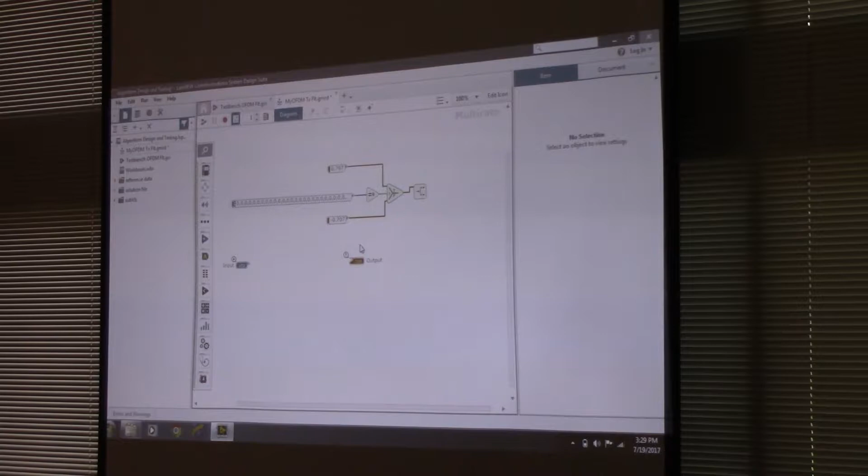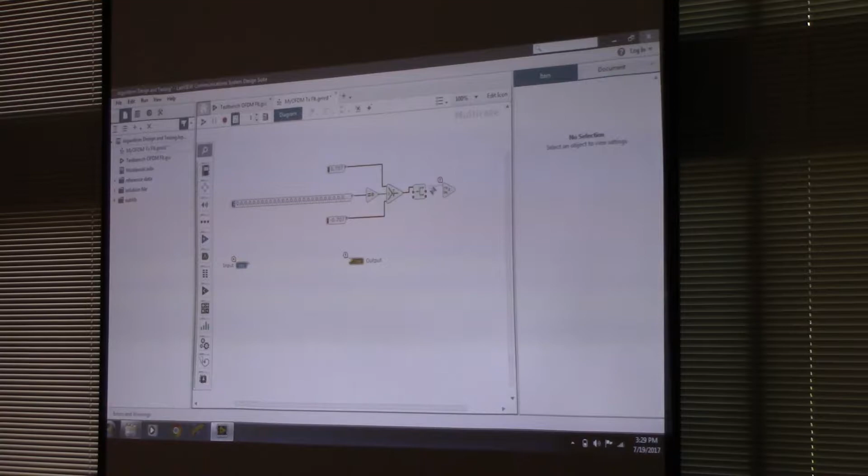So one last thing that I want you to search for, probably not the last thing, I keep on saying that, is if you type in real and imaginary, can you see that top one that comes up? Drop that down and wire the top one into the top one there and the bottom one into the bottom one there. That's really ugly, but we'll leave it like that for now.

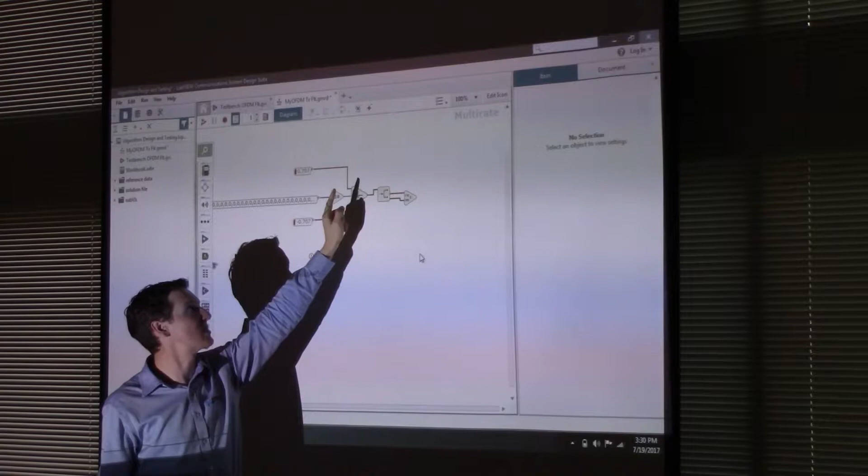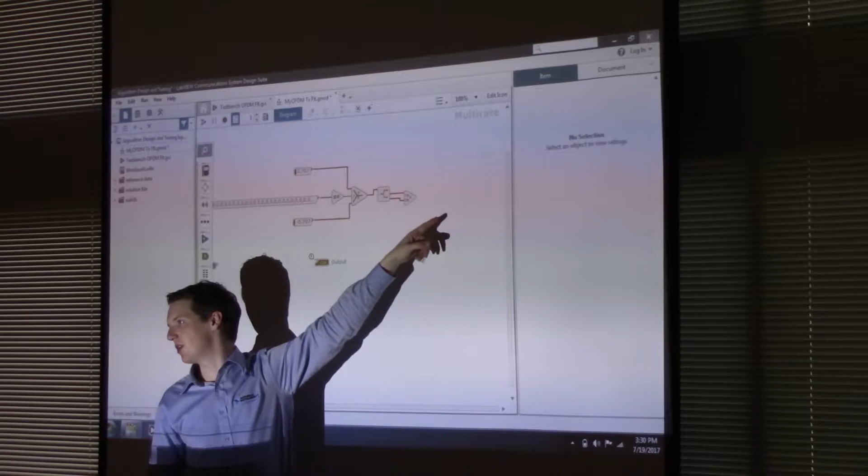So let me walk you through what we did again. We got ones and zeros numeric data. Then we went to Boolean. Now we're back in double precision. But that's okay because we've got symbols at this point. We had bits and now we've got symbols. Now we're getting I and Q. But just to make it easy to talk to the instrument, we're not going to send I and Q as two separate data streams that could get out of time. We're going to combine them into complex numbers. So this is going to be like 0.7 plus or minus j0.7, something like that. So then we keep I and Q aligned together within the same data type.

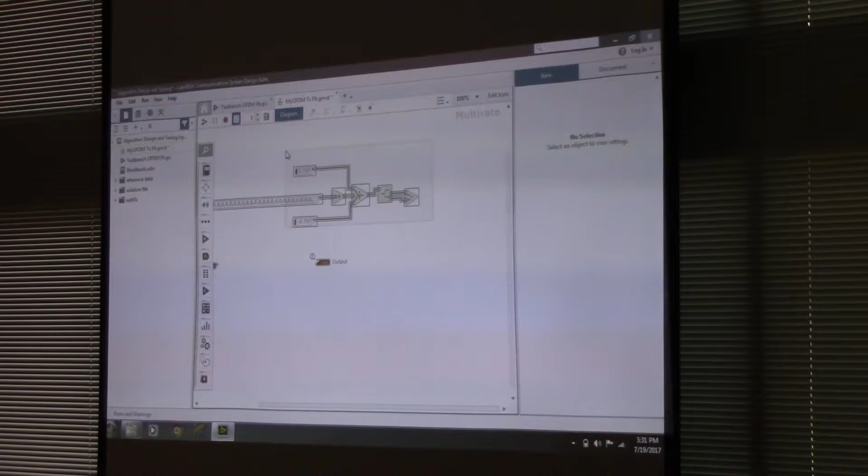And we're almost there. If I just make sure I follow this through correctly, we are creating that training sequence, or pilot bit, if you like, and we haven't defined any user data. So now what we want to do is take all of this and copy it and paste it down here as well. So you get a duplicate copy. But you see the data input, I'm actually going to delete that. So I highlighted over it, I clicked it, and then I pressed the delete key on the keyboard.

And what we want to do is, if you remember from earlier, we have this input. We want to put input in. But hang on, we've got a data problem again. So input, if you click on it, can you see it's an unsigned 32-bit integer? That's not going to be compatible here. So what we need to do is just disaggregate that data. So that's another function inside of the stream. Oh no, actually, I think it lives in one of the other palettes.

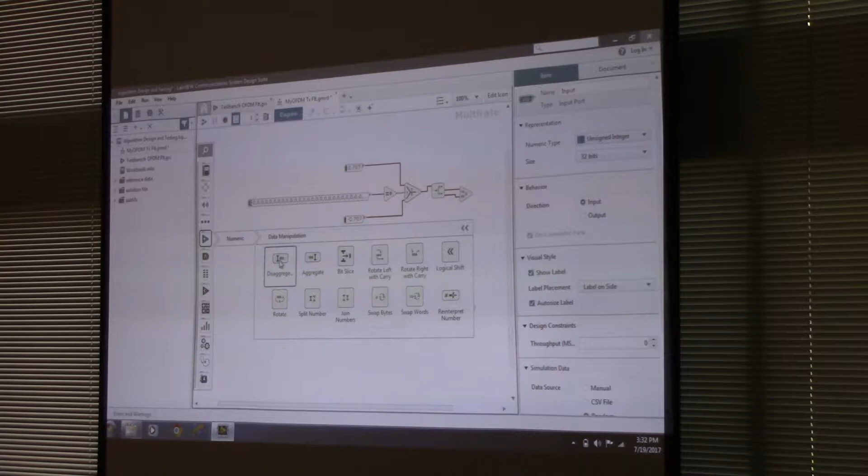Disaggregate. If you want to know where any of the functions that you're searching live for future reference, you can click on Show in Palette here on the right-hand side. And if you click that, it brings up where that function lives. And what we're going to do is, inside of here, instead of output chunks 2, let's put that into output chunks 32. You can see that creates a constant on the diagram for us. And then we can wire it up like that.

Now the last thing we need to do, does anyone know how many pilot bits are supposed to be sent for every piece of user data in the OFDM standard?

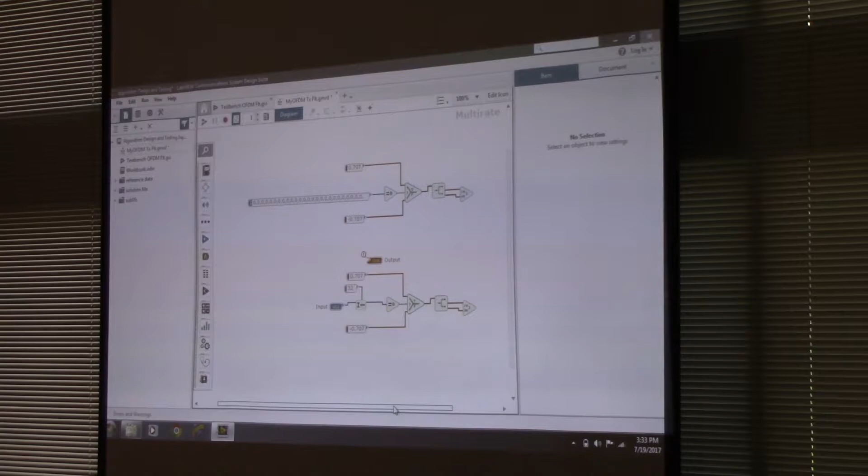So what we do over on the right-hand side is we just bring up one more function, which is this interleave stream. We can place that down, and then we can wire in our 2 streams. And there's no need to define these because we can do that through configuration. So we can leave input stream 0 at the top. That's the pilot bit, so you just leave that at 1. That's all we want. And if you put this up to 5, you can see it creates a constant. So what this will do now is for every 1 pilot bit, it'll take 5 user data bits.

Now, coming back to the question on sample rate, if you wanted to do this in normal LabVIEW or in C or in a different language, you would have had to have used loops. That's because in normal LabVIEW, every time, say, one function block runs, it waits until all of its input data is ready, and then it outputs all of its output data. You would have had to have put that in a loop. So we would have had to have had some weird loop structure that ran the top code once, then the bottom code 5 times, then went back to run the top code once, the bottom code 5 times.

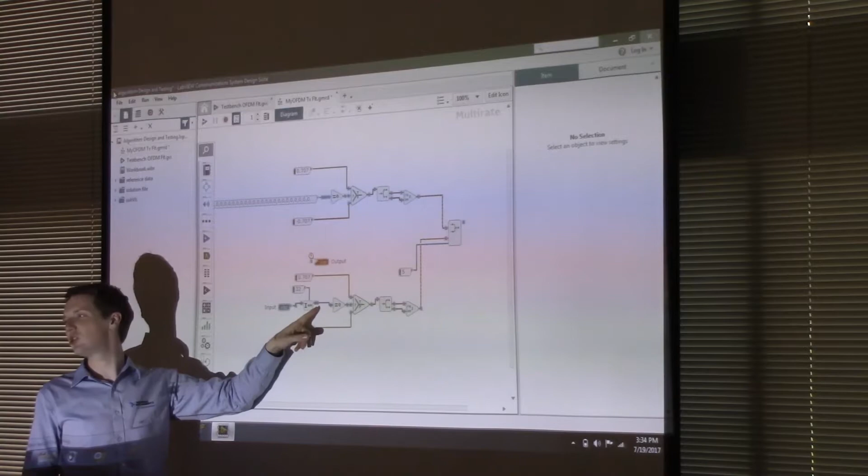Up here, you can change what you're viewing. If you click on that at the top right and put sample counts on, you get the whole screen's covered in little numbers. And what you'll see is that for every time the user inputs a single value, that creates 32 bits. That makes sense, right? Because they're inputting a 32-bit value. Every time we do this disaggregate, we're trying to create I and Q, we have to wait for 2, just like you said, 2 of those symbols before we can define I and Q here.

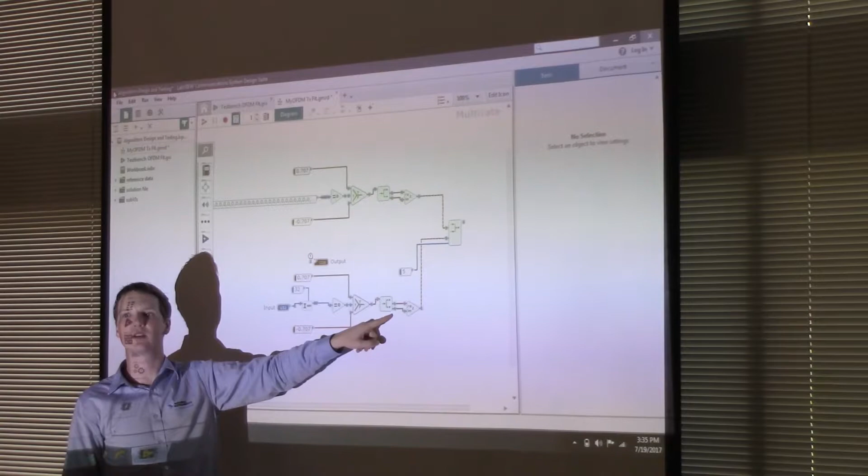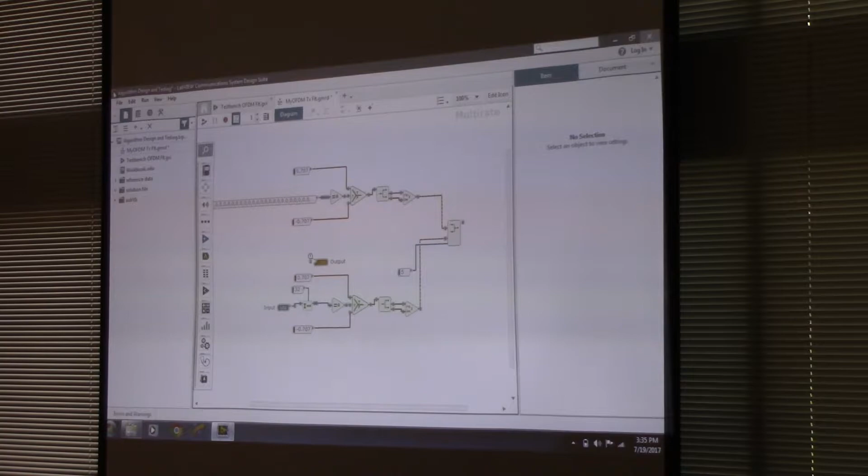For every 1 time this piece of code runs at the top, the bottom piece of code runs 5 times. And you can view that through the number of iteration counters on those samples. All of this, whilst you are designing that algorithm, has all been done for you under the hood by LabVIEW. So you never had to implement all that crazy computer science nested loop disaster stuff yourself that gets really hard to debug.

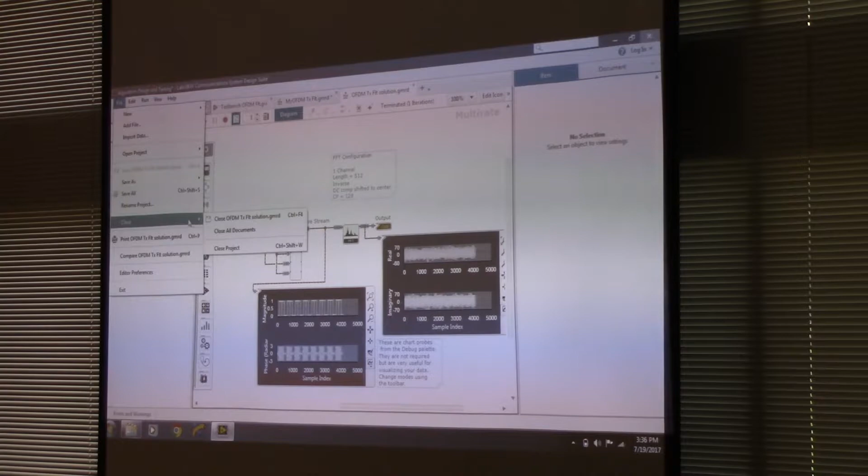So what I'll do now is I'll try and just squeeze in the last exercise and then maybe leave a little bit of time for conversation as well. So back to our favorite button, File, Close, and then go Close Project. It'll ask if you want to save. Just say no. No need to save. And what we'll do is you get back to the Learning screen on the Learn tab. Let's go into Getting Started. Overview of the FPGA design flow.

This time I want to show you one really cool feature inside this software, which is the fixed point conversion. Has anyone ever converted a communications algorithm to fixed point to run on FPGA? Sorry? Yeah, that kind of thing. So when you create your algorithm in MATLAB, and then you test it out in Simulink, and then maybe you use like the HDL coder or something, or like, sorry.

Yeah, exactly that. And you have to take all of the constants and all of the multiplications and stuff that you have inside that algorithm. Hopefully you haven't got any divisions because they go really badly in fixed point. And you have to convert them all over in order to deploy to the FPGA.

Well, when I did that in my degree in about 2010, we couldn't use the HDL coder, which takes your algorithm and converts it to HDL for you, because we were coming up against too many compilation errors. So we had to go a manual route. We actually downloaded huge Excel spreadsheets of floating point to fixed point conversion.

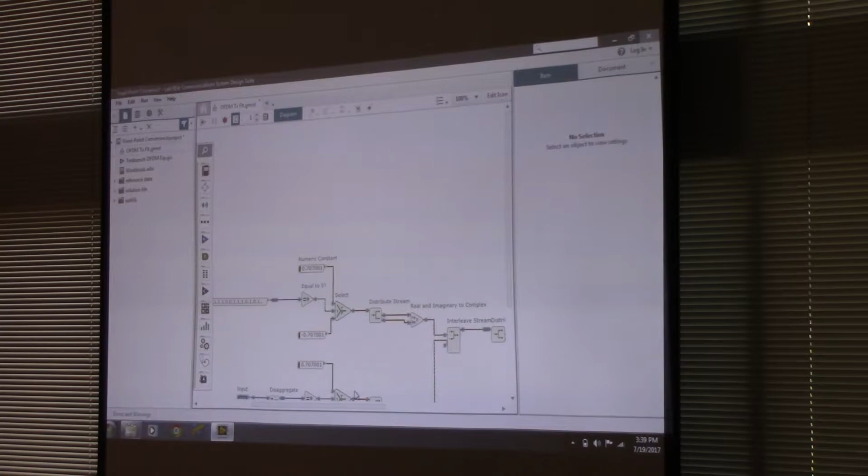No, so this is, you'll recognize this, right? This is the algorithm that you were just designing. So this is a completed version. Let's not mess around with this for the sake of time. So we can close that for now. Open up the test bench here. Now what we're going to do is, can you see you got the panel? This is the user interface of the code, and you got the diagram. Click on the diagram, and let's do some coding behind the scenes here.

So right now you have a test bench. So you can see on the left-hand side, it generates a random bit stream, puts it into the file we want to test, does a comparison. At the moment, it's just doing like an autocorrelation with itself because it's only got one thing to test, and then it gives you the results of the test and tells you how good the algorithm was at converting that pseudo-random stream of bits.

What we're going to do is we're going to take that solution and we're going to duplicate it because we want to go mess with it. Right now, all this is running up on the laptop, so all of this is floating point stuff, and we want to try and make an FPGA version. And what we want to see is the difference between our FPGA implementation and our desired real algorithm that we've been developing high level on Windows.

So what you can do, if you click on that block in the middle and then come up here to Edit, I want you to click on Duplicate Hierarchy from Selection. You'll get this window. Just name it, I don't know, what should we name it? Just like FXP, so fixed point copy, will do absolutely fine. And then press Duplicate and Place on Diagram. Do you see how I have it now selected? I want you to drop it in right underneath there.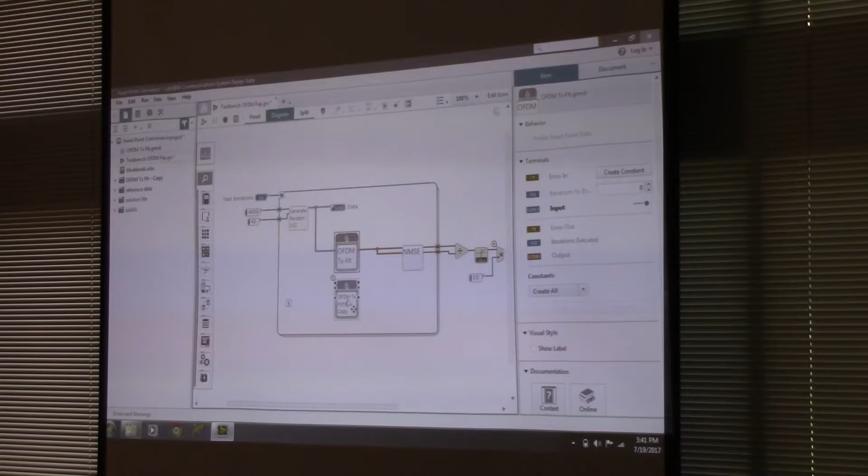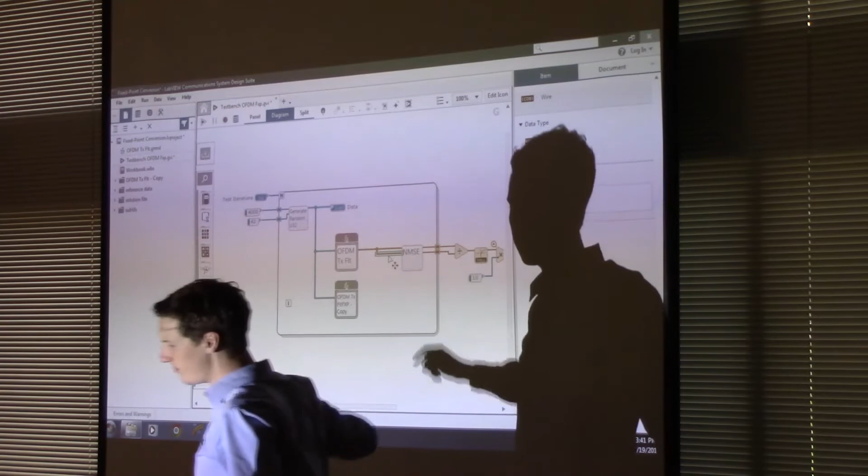And what we're going to do is where that input that says input, I want you to wire that up to the same bit stream here so that we are doing a valid comparison. Then you can click on this wire. You see how I have that wire selected here? Click on that wire, hit the delete key to get rid of that. And into our comparison then, I want you to wire the output. So you see the code as I have it now.

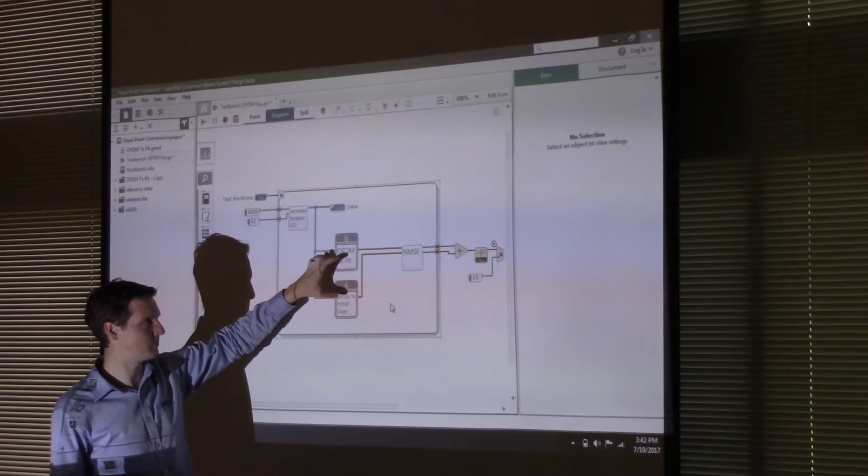So now what we're doing, our test bench is generating the same data set for both algorithms. It's putting it in, and then we're getting the output from both algorithms, and we do a comparison. So come back now to the panel and press run. You see the little green run button? Mm-hmm. And now the mean squared error in dBs is that difference. That's the result between these two algorithms. And it says minus infinity, or may say plus infinity on your screens.

Why does it say infinity? Any ideas? There's no error, there's no difference, because we didn't change anything about the algorithm, right? We just duplicated it, so we're still comparing it with itself. So let's go back to diagram. Let's go make changes to this now then.

So what I want you to do is if we click on this, we're going to have to do a little bit of manipulation. I can't click that yet. Why can't I click that? What do I need to unlock? I think we might need to just save this. So if you go to File, say Save All, and just press Save. Yeah, that was it. I couldn't go changing the algorithm before I'd saved the project, which is actually a nice little safety feature before I go messing with my algorithm. But luckily we're messing with a copy of it.

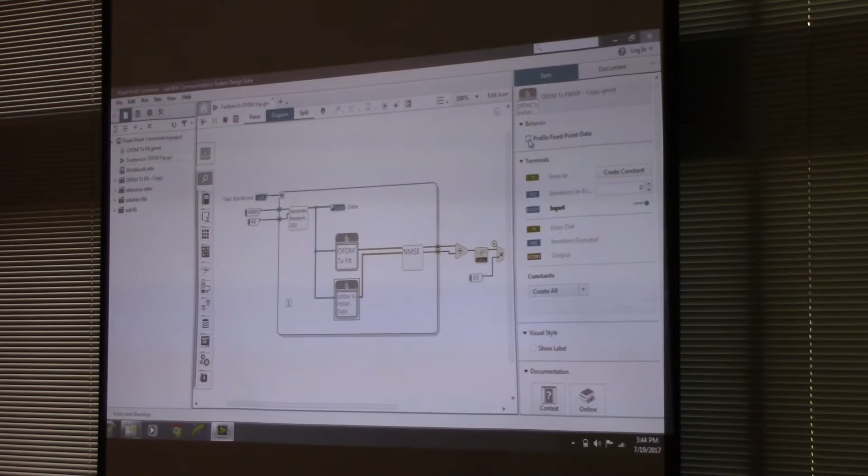So after you've pressed Save and you've gone through that, click on this bottom box, and can you see in the configuration pane over on the right-hand side here, you have Profile Fixed Point Data. So I want you to click on Profile Fixed Point Data, and does everybody get this at the bottom?

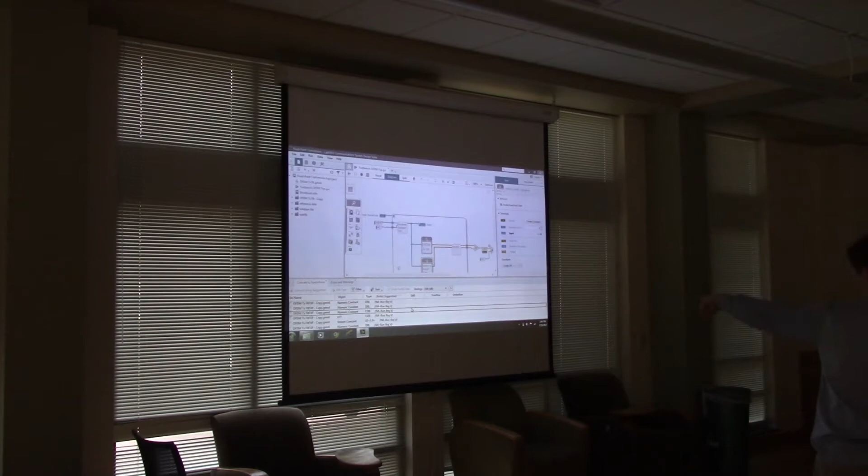So this is a little profiling tool down here, and what this is going to do is it's going to make suggestions about the perfect, if possible, fixed point values to use in order to get an excellent copy of the algorithm that will work on an FPGA. You can see all of its suggestions down here for all the different constants it's found within that code, say run required.

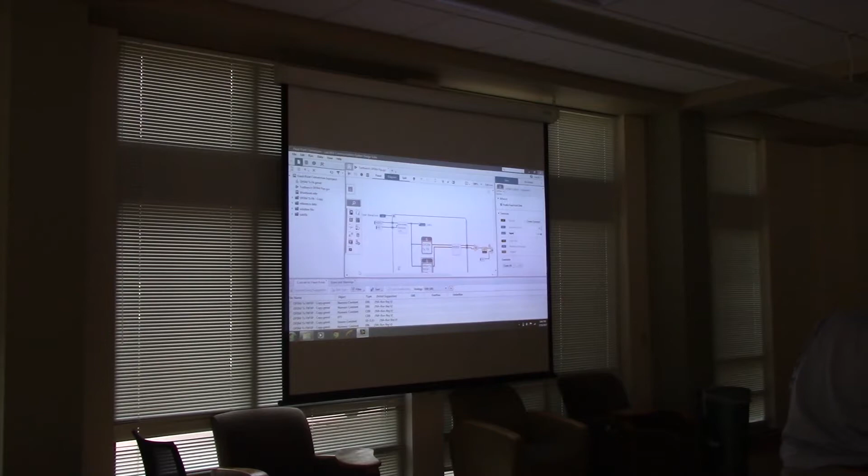It hasn't had a chance to run the code in the profiling tool, so at the top here, just press run. And now what you see is for every different constant that it's found, it's made suggestions on exactly what precision and what fixed point data type to use.

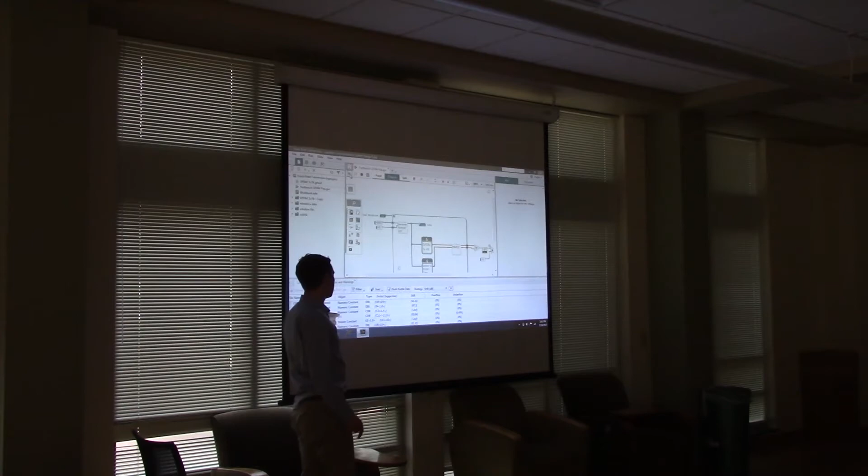And it's real easy for these numeric constants. Remember, those are those numbers we were putting in, 0.7, minus 0.7, all that kind of thing. That's easy. What's difficult to represent on an FPGA is an FFT. That's really where this whole algorithm's quality is going to hinge on if we want to make a working prototype. So what we're going to do now is mess around with that number.

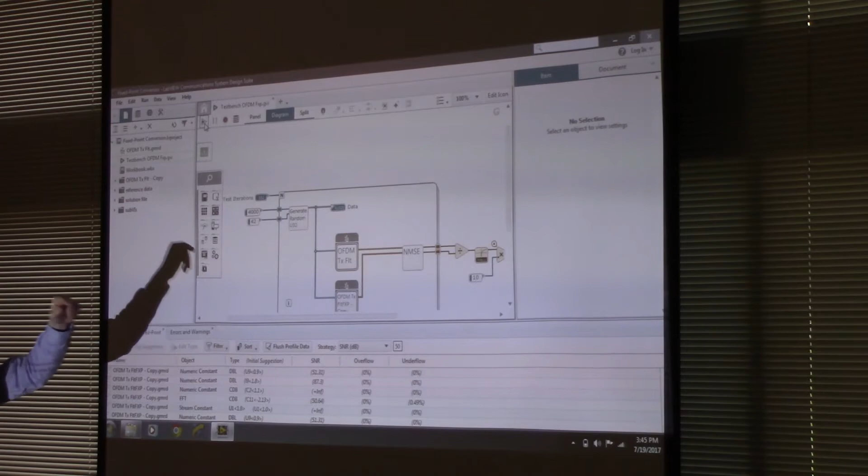Now, it made this suggestion to use an 11-bit fixed point, negative 2.13 precision, and it thinks that the SNR, so the dB difference between the perfect algorithm and the resulting algorithm, will be about 50 dBs, 50.6 dBs. So let's go and actually test that out now.

So if we navigate back here to the panel, what we can do is actually run a test of that. So come down here and click on one of these file names. And then using a super common Windows command, if you go Control A, it'll select all. Does everyone get this view?

All right, great. Now we're going to say, okay, thanks very much for your suggestion. Please implement the suggestion you have made. It will implement the recommended suggestions based on what you have here in strategy. We are going for a strategy where we prioritize the signal to noise ratio of this algorithm. So we'll leave that on SNR and then press this button on the left, convert using suggestion. That should just take a second to do the conversion.

And now what we can do is run the code again. Aha, it's compiling. And once it's done, you all should see a value of about negative 55 dB SNR on the difference between those algorithms. Which is a great success, right? That's a significant chunk of SNR. We haven't impacted the algorithm.

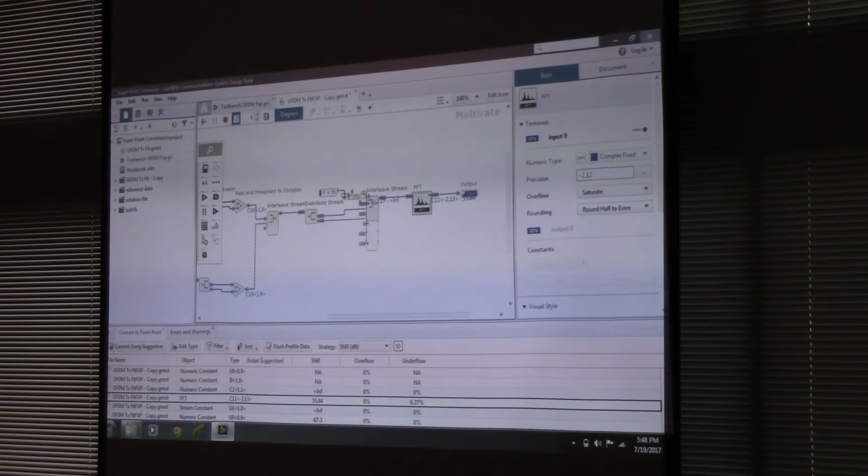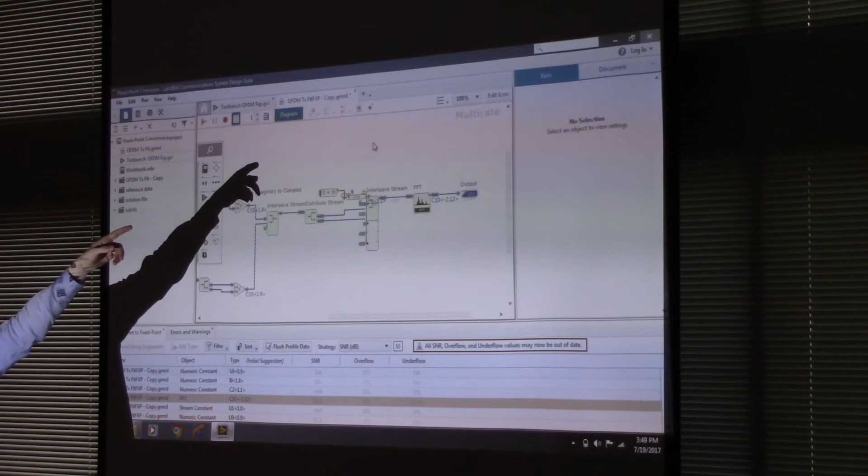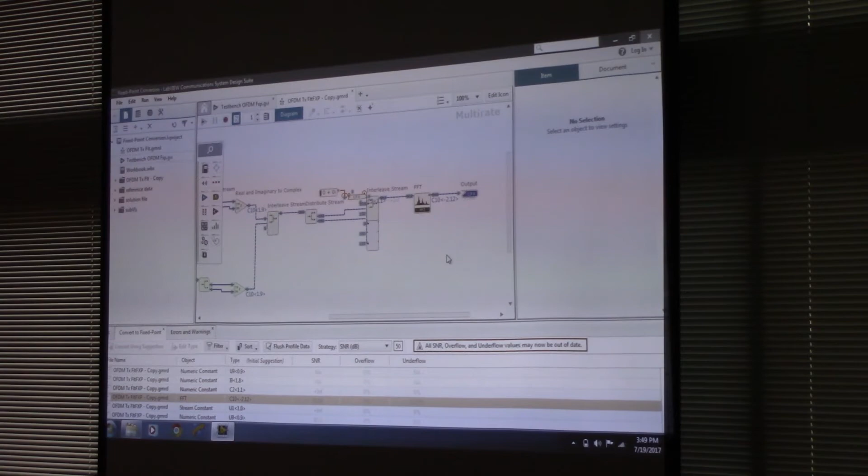So if you click inside there and change that over to negative 2.12, click outside of here, can you see that we've got this little asterisk at the top? That's just telling us we've got changes that need to be saved on our code. So go up here to File, Save All, and the little asterisk should go away. And now we've changed our algorithm's fixed point implementation.

So we'll go back into here, navigate to the panel on the test bench, and compare those two algorithms again. Remember, our previous value with the perfect suggestions was negative 55. We made a very small tweak. If we run that again, you should see a new value of negative 50. So that's actually not as good. We made a bad change. But I'm just showing you how you can tweak the algorithm a little bit in order to get a slightly better value.

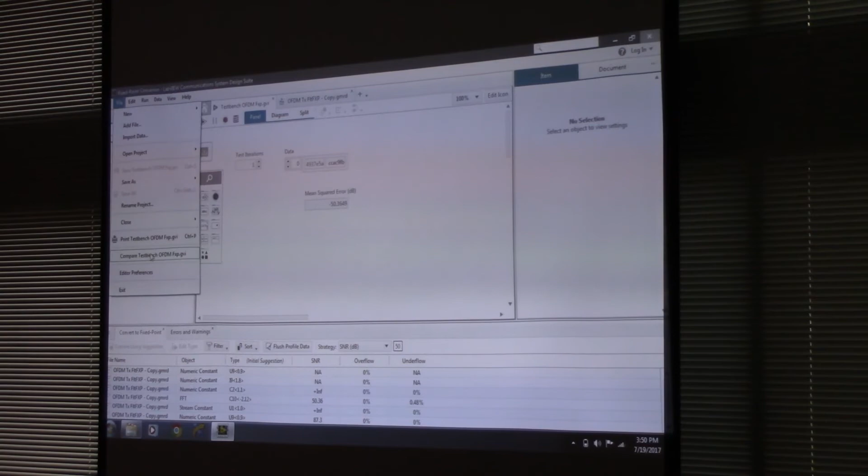Now the next step after this would be if you came to, say, close that project down, go to File, Close Project. We were in Getting Started, an overview here. We skipped the very introduction. We did steps 2 and 3 of creating an algorithm that could run on an FPGA. Now what we need to do is actually deploy the application down to the FPGA.

I'm going to stop here because we've got just 10 minutes left. I'm not going to go and do that. One of the big reasons is that FPGA compilation takes time. This is a very small algorithm. It would probably just take 7 or 8 minutes to compile, maybe another 7 or 8 minutes to set up that compile. But if you've got a large, say an entire LTE stack, you could be talking about compilation times, depending on what you compile on, anywhere from 30 minutes to 8 hours, if you're on like a little i3 laptop or something like that.

A lot of people use a compile farm or a compile server. So NI tools are automatically hooked up to Amazon. It might be Azure servers now. You can send off your FPGA code to the cloud and it'll compile like 10 times faster on a supercomputer somewhere in the continental US and then get the bit file sent back to you ready to use on the FPGA. So at that point I'll stop.

There's a huge amount of stuff inside of here in Learn and Examples. There's all these lessons that you can go through, some of them with hardware, some of them without hardware. LabVIEW Communications is something you can get off the ni.com website. You can get an evaluation period for like 45 days completely for free.